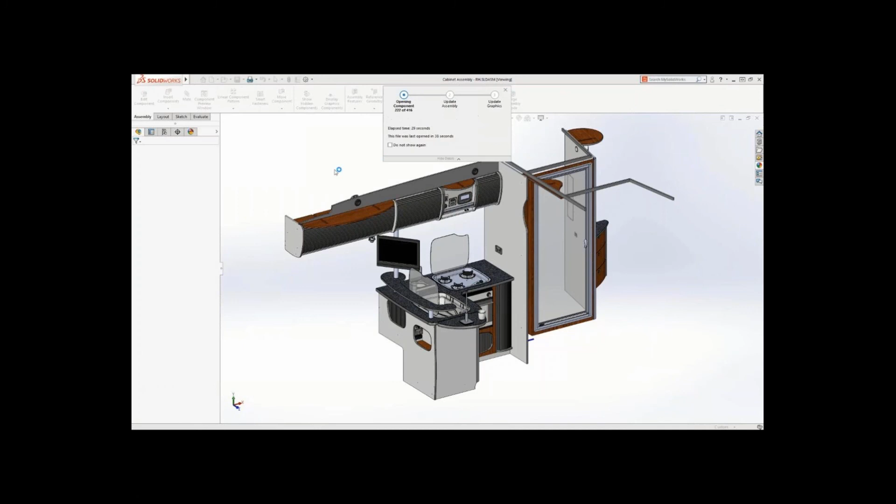Gaining deep insight into how your assembly is performing and which factors are slowing you down is where the new assembly performance dialog excels. SOLIDWORKS 2018 includes many more checks such as open time, shaded image quality, and number of graphic triangles. Here, several parts have been set to very high image quality, which dramatically increases the number of graphic triangles, which can have a detrimental effect on performance.

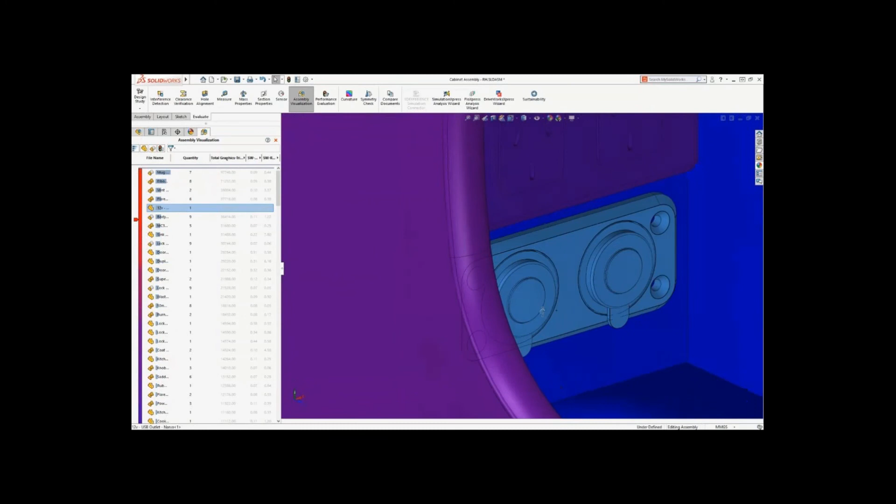To gain deeper insight on how problems are slowing you down, SOLIDWORKS 2018 now lets you see clearly the performance information with the assembly visualization tool. This is a really fast and convenient way to display all kinds of SOLIDWORKS information, meaning you can identify problem components. Like this USB outlet - this part itself has very high image quality, which is most likely inappropriate for this scenario. We can change the part by simply selecting a different configuration with low image quality.

Next, SOLIDWORKS 2018 introduces a new top-level assembly transparency option that gives you one step - no need to either set individual sub-assemblies transparent or to create new display states. This new mode lets you interrogate the model more thoroughly and removes extra steps that are needed to add the transparency.

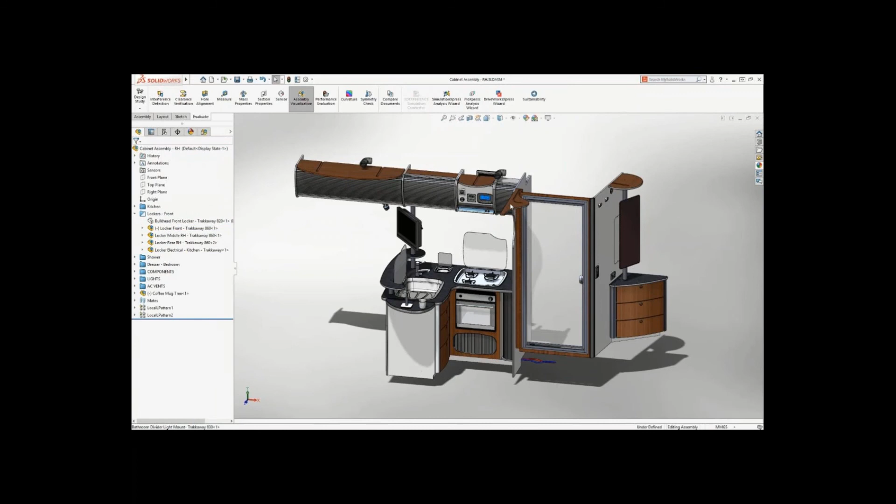Folders are widely used by our customers as a way to logically group parts and assemblies without creating more sub-assemblies. SOLIDWORKS 2018 now color codes these folders based on whether they contain hidden or suppressed items. This gives you a simple visual cue to help identify these objects faster than ever before.

Now, mouse gestures are more flexible than ever in SOLIDWORKS 2018. You can select two gestures, horizontal or vertical, right up to 12. It's simple to drag new commands into the gestures, and you can even copy them between modes by dragging and holding the control key. You also have a handy printable guide for your office or desktop.

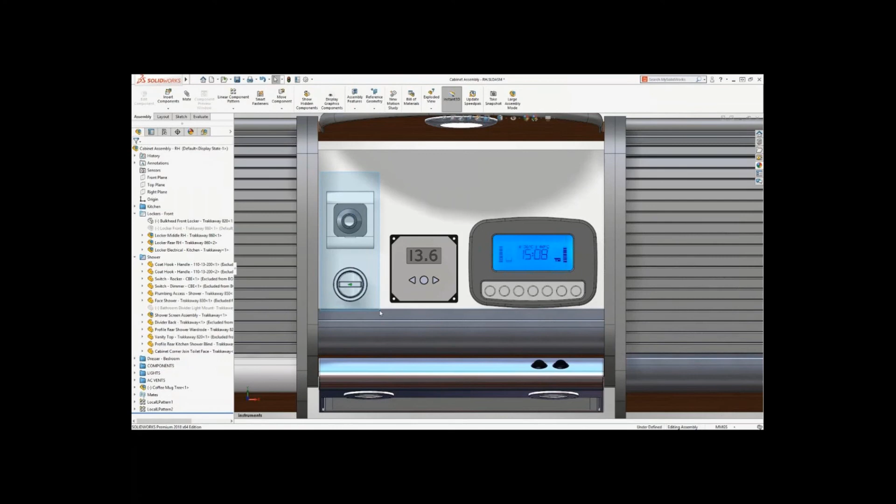It is common that when you zoom right into the model, you need to box or lasso select geometry or components. Previously, this required you to select in open space before dragging. Now in SOLIDWORKS 2018, a new option called Select Over Geometry removes this limitation. You can either select it in the drop-down or use the T key shortcut to enable it. You can even use the Control key to select multiple items at once.

Now, these are some of just the enhancements that help you focus on your design and improve your everyday experience with SOLIDWORKS 2018.

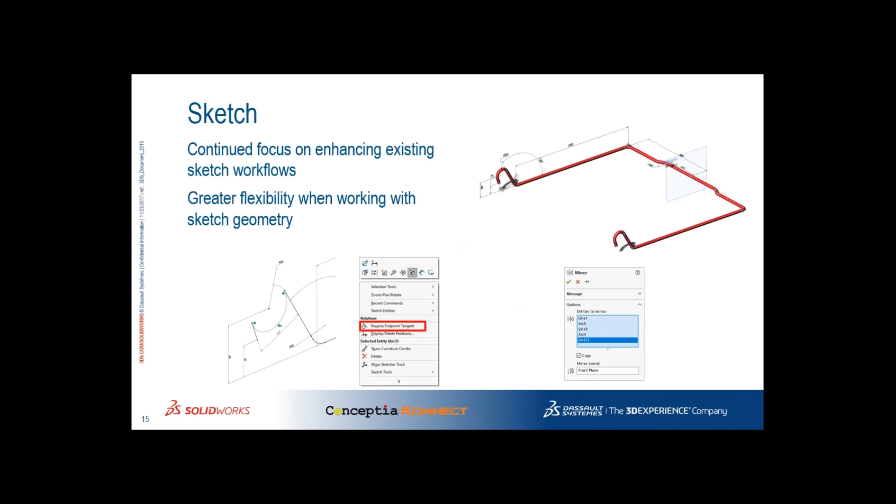Next, we'll take a look at sketches. Sketches are the fundamental building blocks of any SOLIDWORKS design. Therefore, you need them to be as intuitive and as productive as possible. SOLIDWORKS 2018 builds on existing sketch workflows, adding new capabilities for customers working with 3D sketches and more flexibility when modifying arcs and splines. Let's take a closer look with the software.

Now, SOLIDWORKS 2018 delivers some great new capabilities that enhance existing sketch workflows. Let's go ahead and finish the design of this support bar. Giving you more flexibility when working with arcs and splines, you can now switch the tangency direction of the arcs using the new option on the right mouse button menu. This new option eliminates the need to delete and recreate the entity that could otherwise cause the downstream failure of the reference features.

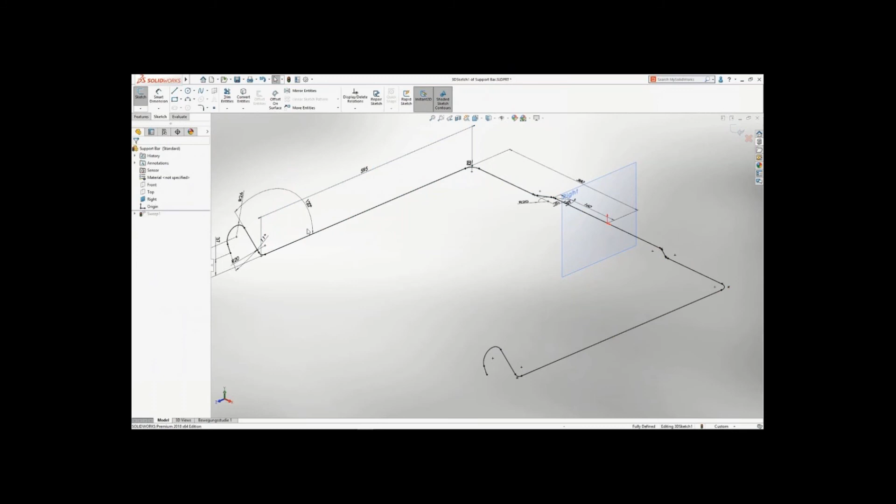Now, when working with 3D sketches, you can build in symmetry at any time by mirroring the sketch entities, and not only that, the planes can now also be used as mirror reference in both 2D and 3D sketches. With this, the symmetric relations are captured and maintained, giving you visualization of the complete shape as you refine your design. Now you can build in all the design intent you need right from the start.

So no matter what you're designing, all these new capabilities in 2018 make working with sketch geometry easier and even more intuitive. This helps you to capture more design intent in the 3D sketches, and the added flexibility in 3D sketches is a powerful enhancement for customers designing weldments.

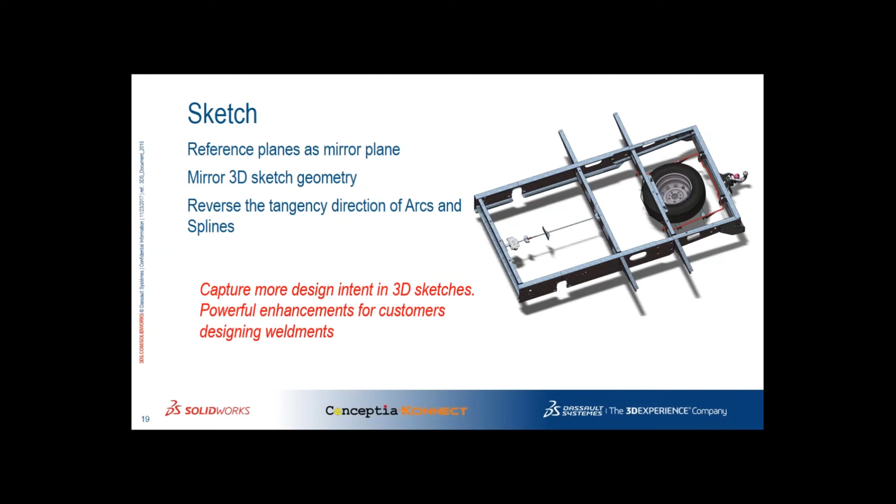Let's go ahead and take a look at the enhancements in assemblies. Now, in today's global marketplace, great products need to get built faster than ever. SOLIDWORKS 2018 introduces enhancements that help you deliver assembly designs in record time and with less effort.

Now, when creating linear pattern of components, you now have the ability to add optional rotation. After choosing the number of instances, you can simply select a rotation reference and specify the increment angle. This speeds up the creation of all kinds of innovative designs and removes the needs for additional features.

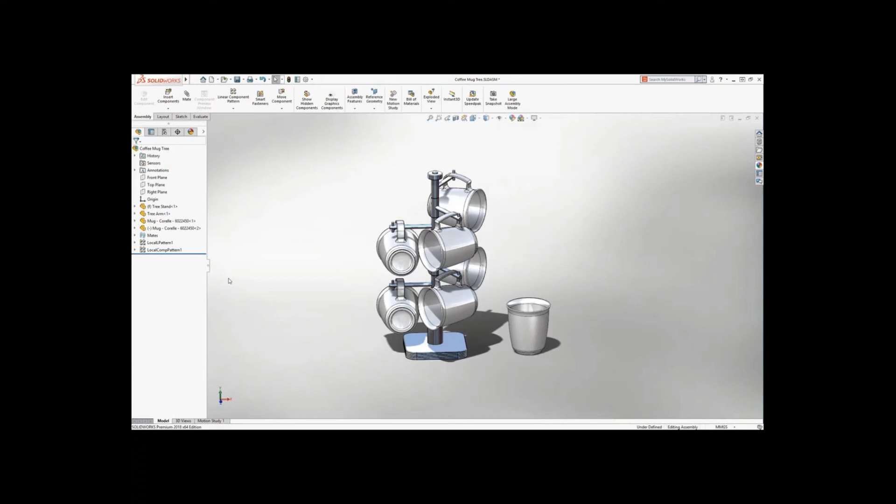Adding mates to hidden surfaces can be a bit more challenging. 2018 speeds up the process by allowing you to temporarily hide surfaces while in the mate command by pressing the Alt key. You can now select the hidden faces and get your parts in place fast.

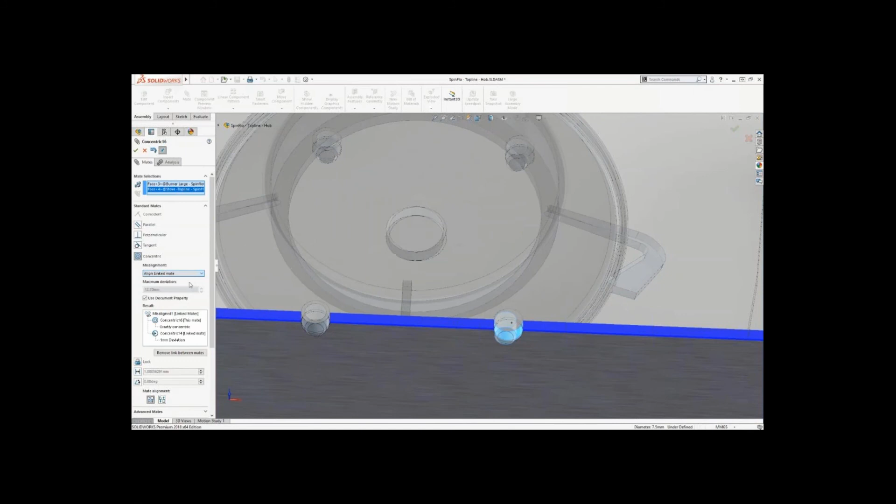When working with components with different units or even imported parts, you have a common scenario where pins and holes in the body do not exactly match, as in this case. Previously, it would not be possible to add the second concentric mate. Now in 2018, you can create misaligned mates. This allows you to add two concentric mates to be solved correctly by maintaining the concentricity of either mate or by shifting the component symmetrically between the two, solving accurately and giving you instant feedback.

The PropertyManager displays useful information about the misalignment, and also the deviation of each mate from the concentricity is shown, and you can set the maximum allowable deviation. This value can be controlled by a document property, and misaligned mates are shown clearly in the mates folder, and for additional control, the ability to create these misaligned mates can be disabled in the system options. This capability removes the need to make small changes to legacy components that may be used in many different assemblies.

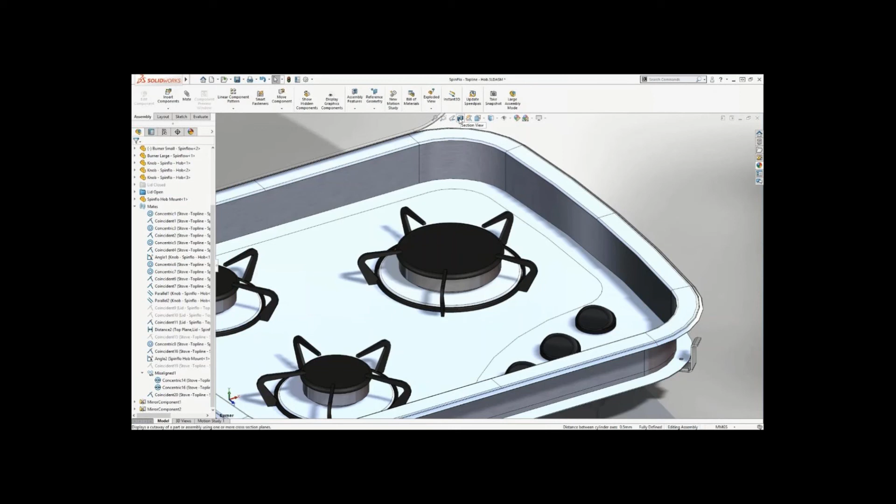Creating exploded views is great to understand and communicate your designs in SolidWorks. Now with SolidWorks 2018, you can quickly and easily create automatic explode lines using the explode line tool. SolidWorks automatically gathers all the components in the exploded view and previews each explode line. The explode line for each component defaults to the bounding box, but you can easily choose the origin or even drag to any other point.

SolidWorks allows you to apply this to every other identical instance, saving you a load of time and effort. As you would expect, modifying the exploded view updates the exploded lines instantly, keeping everything accurate and up to date. These are some of the enhancements in SolidWorks 2018 that improve your day-to-day productivity to get your products and assemblies built faster.

With this, we can build assemblies faster than ever before.

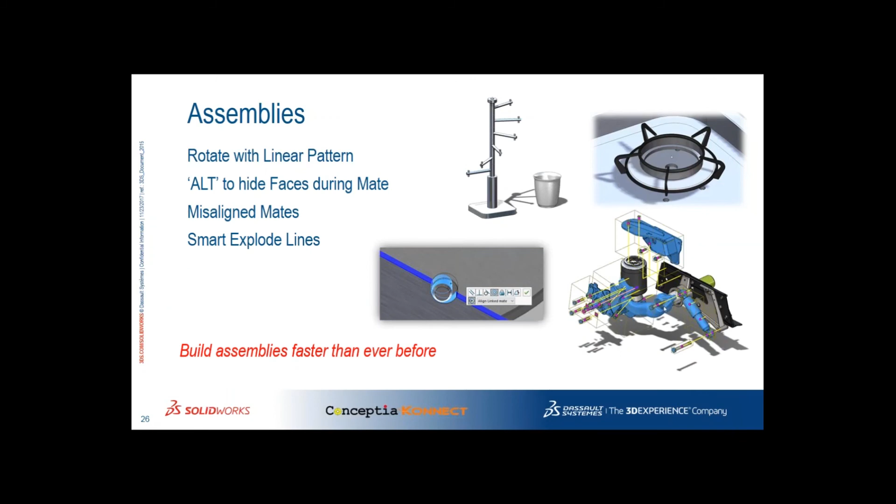Next, magnetic mates were introduced in 2017. They enabled users to easily snap components together to efficiently organize equipment and optimize the space. Many use cases have been identified, such as equipment layouts and rapid assembly of components with common mating interfaces. Now, SolidWorks 2018 brings continued development to this tool. Let's take a look at the improvements in magnetic mates.

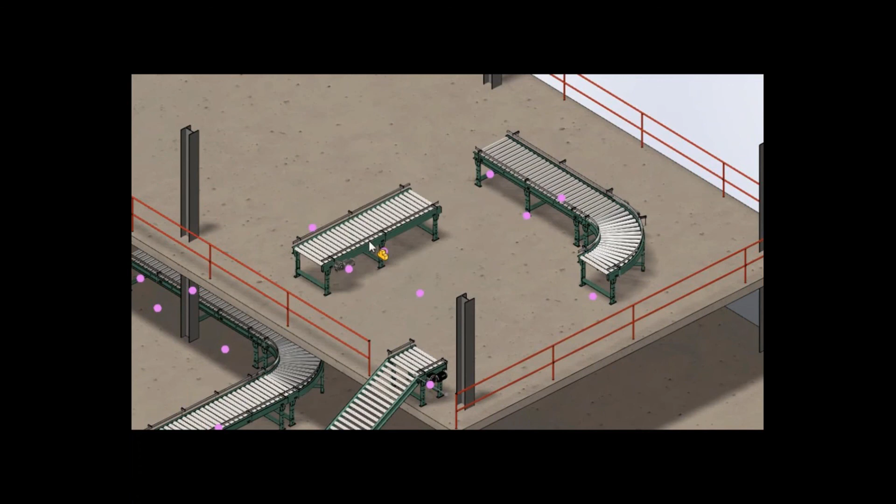There are several enhancements to the magnetic mates tool. First, we now support multiple ground planes. You can simply activate the ground plane you want to work on, and when you assemble components with published assets, they will be snapped to that ground plane automatically. The tab key rotates the component around a vertical axis for better positioning.

Locking a magnetic mate from being unsnapped has existed before, but now it is much more discoverable. The lock mate icon appears as soon as a component is placed. This is much easier than finding the mate in the feature manager tree and choosing the lock option.

New keyboard shortcuts are now available to cycle through the magnetic mate options. You can choose the open square bracket to cycle through the mate options on the moving component, and the close square bracket to cycle through the available mate options on the static component.

With the ability to snap components together on multiple ground planes, and easier access to the lock mate and connection point cycling, it is easier than ever to build assemblies.

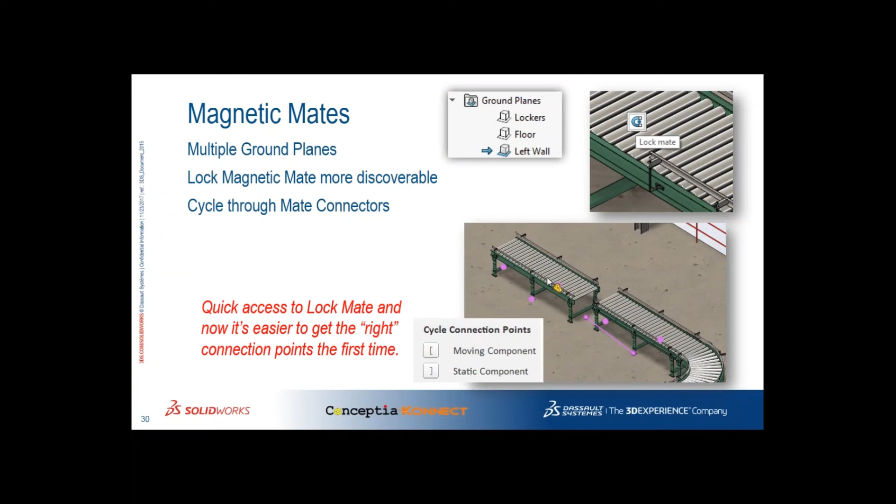Next is SolidWorks Treehouse, a powerful tool for creating and managing assembly structures. The enhancements in Treehouse 2018 focus on improving existing workflows. For example, viewing and editing part and assembly information is quicker and much more intuitive. Let's take a look at these enhancements in more detail.

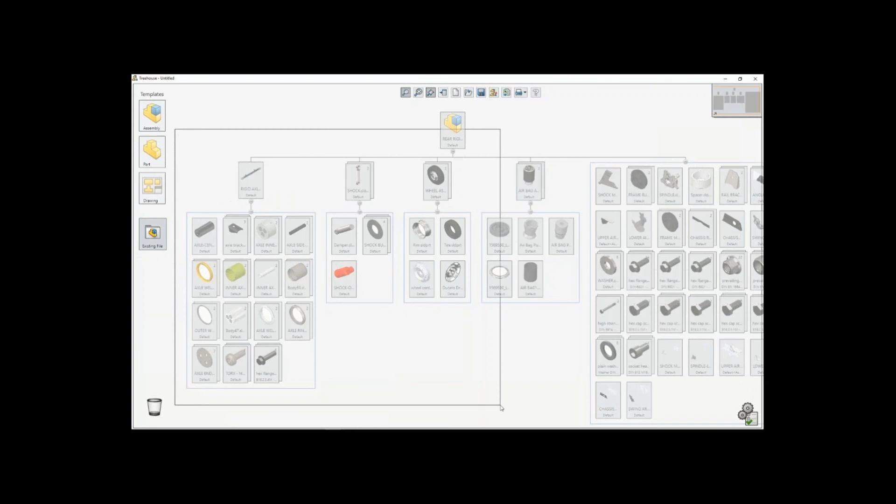SolidWorks Treehouse is a powerful tool for creating and managing assembly structures. In Treehouse 2018, it is easier to view a specified area of the assembly using the new zoom to area command. Simply drag a rectangle over the area of the assembly you want to enlarge, and it is brought into view, making it quick to navigate assembly structures that would otherwise be too large to fit on screen.

Treehouse has been a great way of managing the custom properties of SOLIDWORKS documents. Now in 2018, assembly structures can be viewed in table form using the list view display option. The resulting table makes it easy to view all the available properties for each document, plus additional information such as active configuration, description, and quantity, all in one place.

You can edit the table view at any given time, and when you finish making changes to the table cells, such as changing the quantity of the shock assembly, this is instantly reflected back in the assembly structure, as you can see here.

Next, Treehouse 2018 introduces new options to give you more control when printing your assembly structure. The new print display command, combined with the new print preview option, enables you to easily print any part of the assembly structure with minimal effort. These new enhancements in Treehouse 2018 will make you more productive when managing your assembly structures.

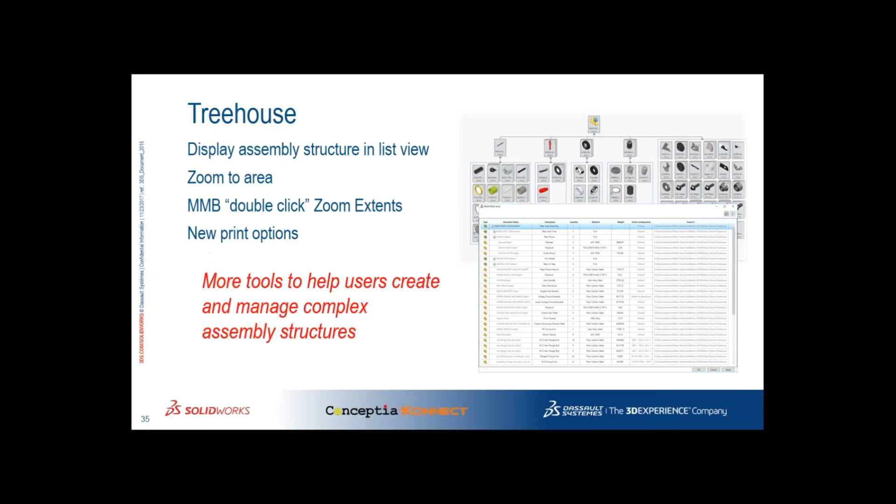Keeping focus on the core parts and assemblies while improving the surrounding tools that are essential to the design process, SOLIDWORKS 2018 delivers the essential functionality to speed up your design process. Next, let's dive right into smart manufacturing.

SOLIDWORKS 2018 puts the model at the center of your design and manufacturing process. It provides a single source of intelligent information for topology optimization, rapid PMI creation, knowledge generation with CNC programs, or creating automatic inspection. Your model is central to all the design process. Let's take a look at what this means in a short video.

SOLIDWORKS 2018 delivers a powerful suite of tools that provides a completely integrated design to manufacturing solution. Validate design function and optimize form, all while building intelligent manufacturing information directly into your design. Then use it to automate downstream machine programming and inspection processes to get your products to market fast.

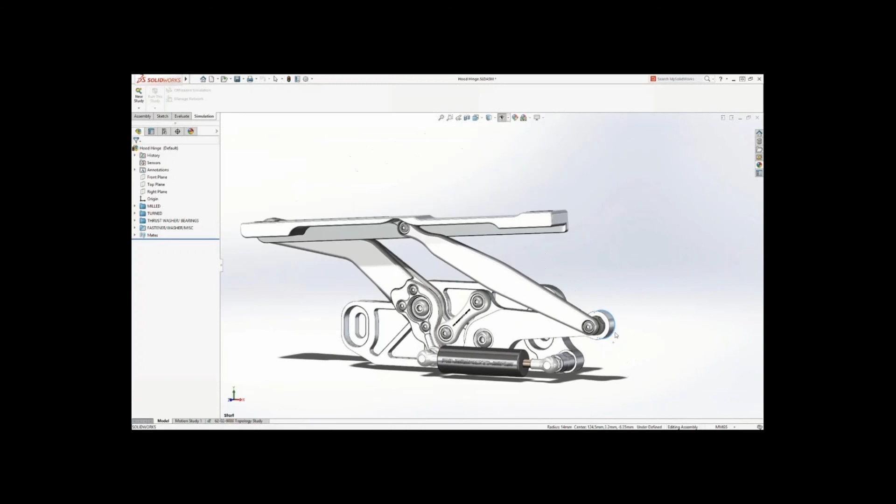Topology Study in SOLIDWORKS Simulation Professional lets you focus on validating the design function, and SOLIDWORKS delivers the component's form. Based on real-life use, desired goals, constraints, and even manufacturing considerations, Topology Study provides results to guide your decisions on component form, regardless of the manufacturing process you choose, and final validation is easier than ever before.

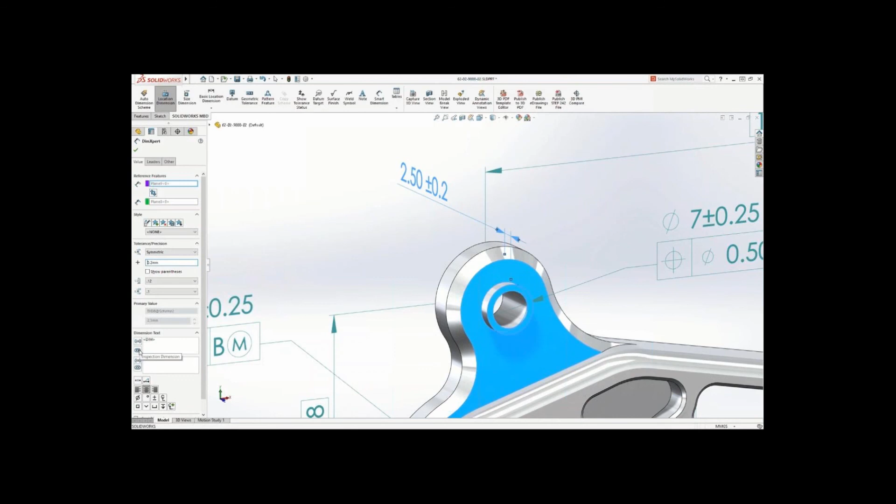Putting the 3D model at the center of the process, using SOLIDWORKS model-based definition, all the product manufacturing information, or PMI, required to manufacture your design can be applied directly to the 3D geometry, removing the cost and time overhead of creating 2D drawings. Presenting PMI data this way makes it easy to understand and removes ambiguity, from detailing relevant datums to features like holes complete with detailed tolerance information.

When you're ready to manufacture your design, SOLIDWORKS CAM delivers fully integrated knowledge-based CNC programming. Leveraging the PMI directly from the 3D model, SOLIDWORKS CAM automatically applies your preferred machining strategies to the part based on the tolerance scheme. If the tolerance specification of a feature changes, SOLIDWORKS CAM automatically updates the machining operations using predefined rules that match your manufacturing best practices. Parts that once took hours or even days to program can now be programmed automatically in minutes.

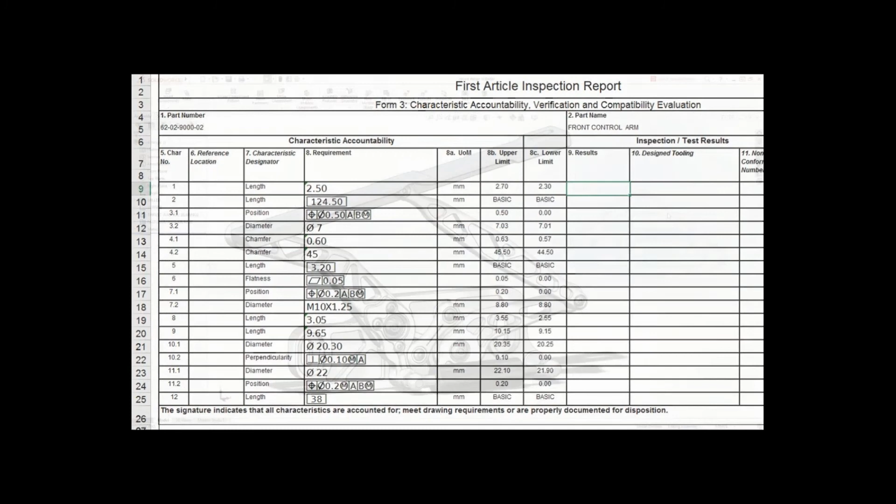At the same time, by using SOLIDWORKS Inspection, your quality team can utilize the PMI on the model to generate first article inspection reports that are ready to be utilized by quality control as final inspection documentation, streamlining your quality control processes even further. In a fast-moving design to manufacturing environment, making sure everyone has the right version of the right document at the right time is critical to ensuring your product is delivered on time and on budget.

SOLIDWORKS PDM manages and synchronizes design data across your entire organization in a centralized, secure vault, providing a scalable solution from just a single project to many locations across multiple geos. SOLIDWORKS 2018 puts the 3D model at the center of your design and manufacturing process, providing a single source of intelligent information that opens up new areas of innovation, increases productivity, and helps get your products to market even faster.

Next, we'll take a look at the enhancements in SOLIDWORKS MBD, that is model-based definition. It is much more powerful than before. If you don't know, MBD is a tool that allows you to create product manufacturing information right onto the 3D part, so that you don't have to create the 2D drawings. So all the product manufacturing information, that is dimensions, geometric tolerances, everything can be given right to the 3D model and be exported as 3D PDFs or e-drawing files, so that you can replace completely your 2D drawings.

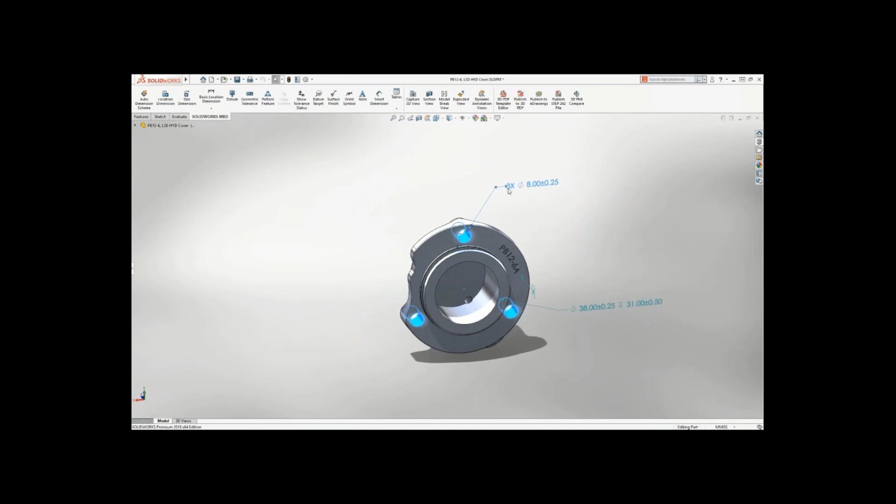Let's take a look at the enhancements to MBD in 2018. Model-based definition in 2018 is more powerful than ever. It allows you to more accurately define all the manufacturing information needed within the 3D model. This cover part represents a common scenario wherein the positions of these 3 mounting holes are equally important.

2018 now supports the application of datums to the patterning features, enabling you to more accurately represent real-life behavior.

We can add 3D notes to convey extra product information that would normally exist in a drawing title block. Along with it, we can also add the overall profile tolerances, which can be edited in the standard GTOL dialog box. Let me change it to 0.2.

Next, 2018 now enables the display of the part level product manufacturing information at the assembly level, just like this. This removes the need to recreate it at the assembly level for use in other products like SOLIDWORKS CAM.

You can now remove extra steps of creating corresponding PMI for fixed or floating fasteners. By using this new auto pair tolerance tool, simply select the source and target, and SOLIDWORKS creates the dimension scheme automatically.

New PDF templates are now available in SOLIDWORKS 2018. These have been overhauled to include more information and look more professional. You can now publish 3D notes from SOLIDWORKS directly into a PDF text field. This includes the special GTOL character as we have created earlier.

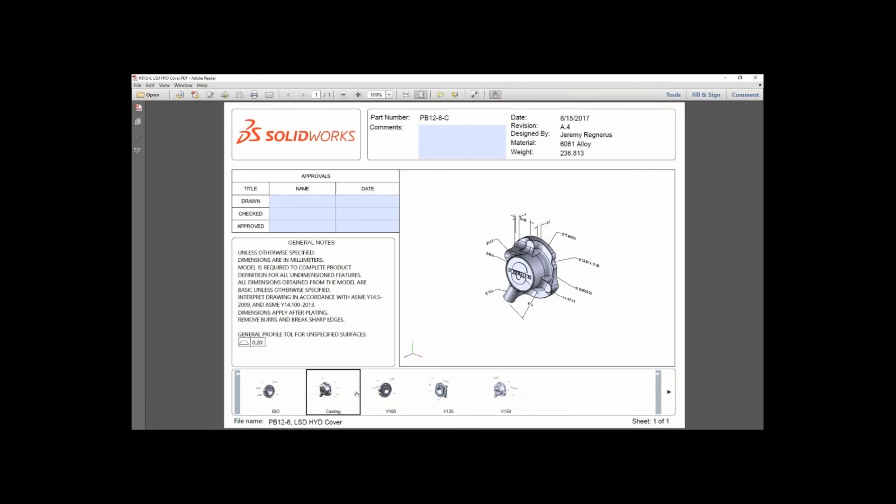The 3D views representing the different configurations of the cover are now accessible with the below thumbnails. New in 2018 is the animated slideshow, which helps you bring your design to life right into the PDF. Finally, custom properties can now be reported as configuration specific, giving you more information about the whole product family.

In addition to PDF, many companies use e-drawings to distribute their product information. During the export process, you can now choose whether to export STEP 242 files for each of the configurations. These step files appear as attachments within e-drawings and can be viewed, extracted, or deleted from the new attachment dialogs.

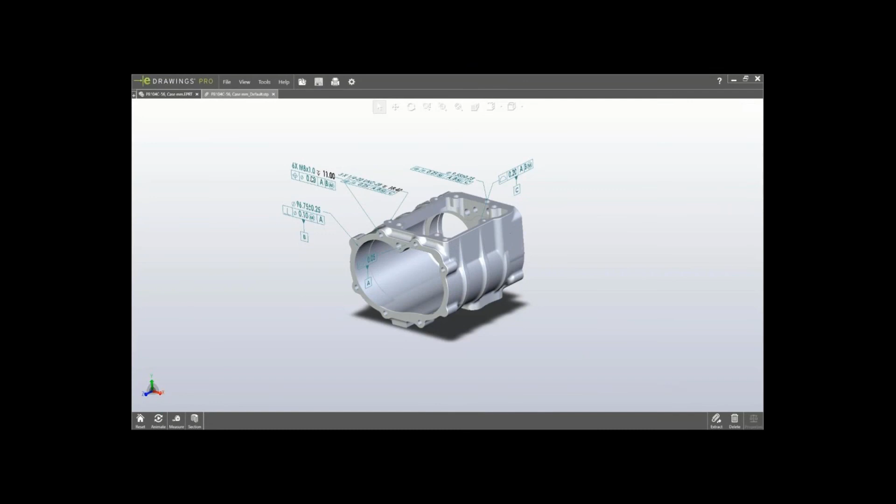Step 242 exported files now contain fully intelligent annotations. These are machine readable by third-party applications such as CAM applications. 2018 now allows you to import step 242 files along with Creo, Siemens NX, and CATIA files, which consist of the PMI source, and the PMI from the source is transferred through and accurately carried across. Highlighting this, the PMI helps you understand and reuse the original design.

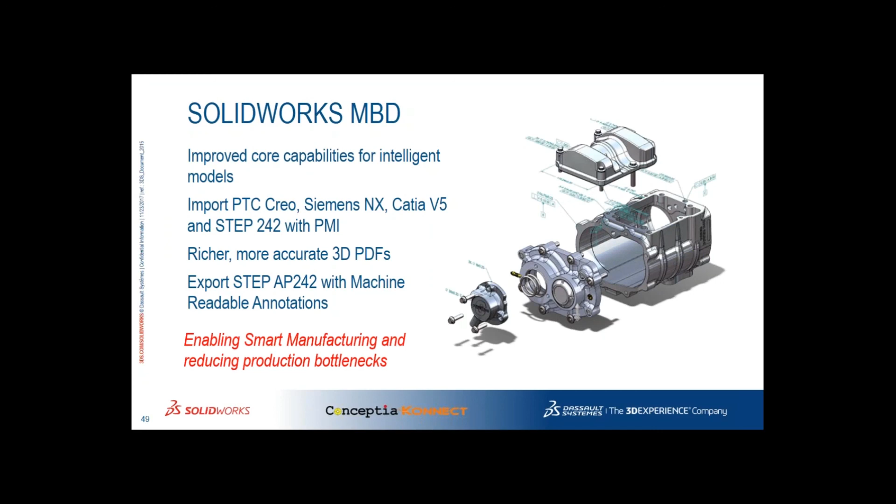MBD helps companies get products through production faster than ever before. Model-based definition helps companies get products through production faster, enabling smart manufacturing and reducing the production bottlenecks.

Next, new to SOLIDWORKS 2018, we are launching SOLIDWORKS CAM. Every year the SOLIDWORKS product keeps on expanding, and this year we have now launched SOLIDWORKS CAM. Let's go ahead and take a look at the product features.

CAM allows you to have CNC programming inside of SOLIDWORKS. It is powered by the existing CAM software called CAMWorks. If you're already using CAMWorks, it is very easy to use SOLIDWORKS CAM.

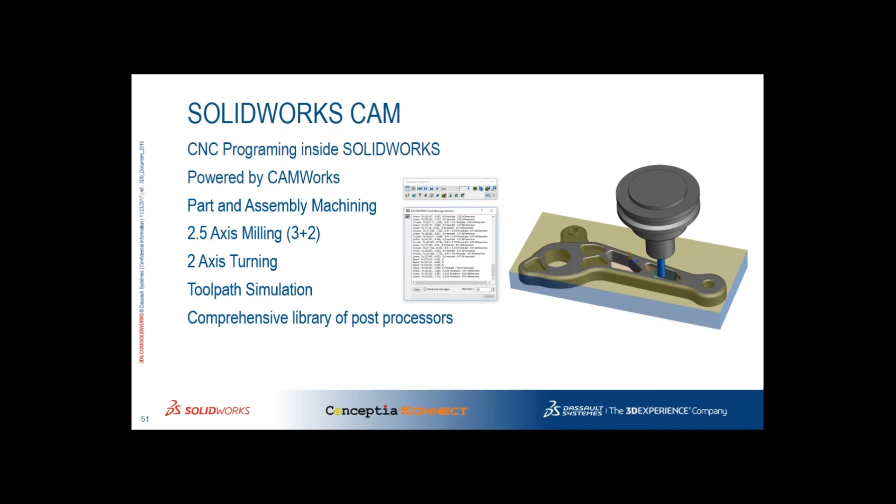Initially, SOLIDWORKS CAM supports both part and assembly machining, and it supports 2.5 axis milling along with 3+2 machining and 2-axis turning. It also has the capability for tool path simulation and has a comprehensive library of post processors. Let's go ahead and take a look at the software, which we are launching this year.

CAM delivers fully integrated knowledge-based CNC programming right inside SolidWorks. SolidWorks CAM generates machining information fast using automatic feature recognition, standard operations and strategies defined with your own best practices, including step over, cut depth, tool type and size, instantly applied to the model, freeing up your time to focus on the critical areas of the part.

At any time, additional machining operations can be manually created using the SolidWorks model geometry. Faces to machine and areas to avoid can be defined using a comprehensive suite of selection options, eliminating the need to create additional reference geometry on the part.

Using SolidWorks CAM's powerful simulation capabilities, cutter paths can be previewed and compared against the original model, helping you identify any potential problems or areas requiring further refinement long before the physical part is actually machined.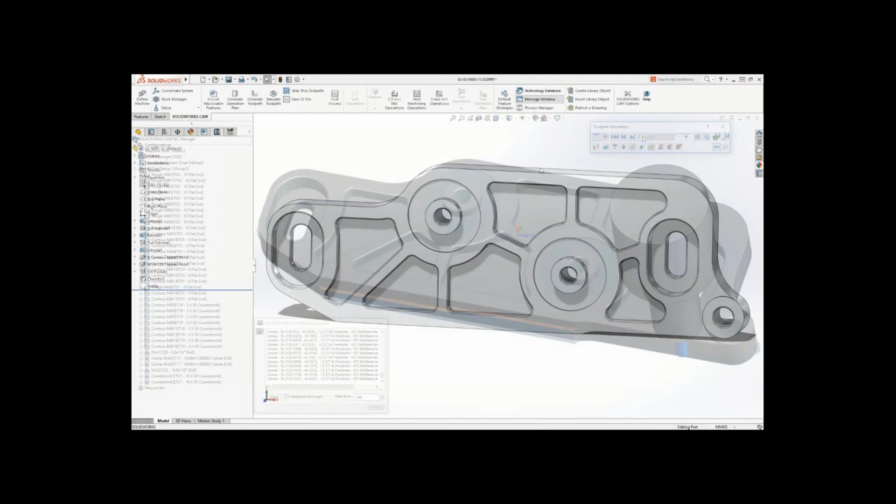Any changes made to the SolidWorks design can be instantly applied to your machining operations and cutter paths, making it quick and easy to evaluate your parts for manufacture, much easier in the development.

SolidWorks CAM can also be used for turning operations with toolpath simulation.

CAM delivers powerful knowledge-based CNC programming for parts and assemblies, milling and turning, that provides a single integrated solution from design to manufacture.

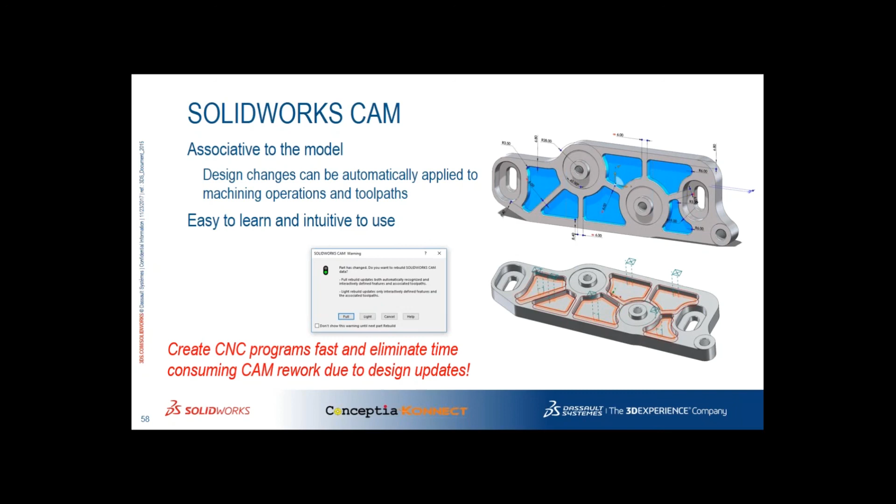Now, SolidWorks CAM supports tolerance-based machining, that is TBM. Let's go ahead and quickly take a look at how this works.

Tolerance-based machining in SolidWorks CAM introduces a powerful new capability that dramatically reduces the time required to generate CNC programs for parts with close tolerances and surface finish requirements. It leverages DimXpert dimensions and model-based definition information created by MBD, applied directly to the 3D model.

With a single button click, SolidWorks CAM automatically applies your preferred machining strategies to the part based on the tolerance scheme. If the tolerance specification of a feature changes, SolidWorks CAM automatically updates the machining operation using predefined rules that match your manufacturing best practices.

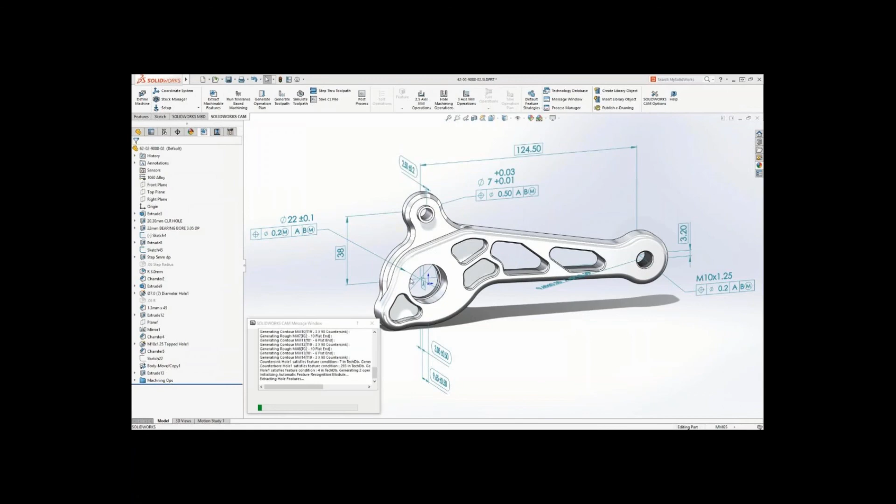Parts that took hours or even days to program can be programmed automatically in minutes. Asymmetric tolerances can be adjusted to mean values, and all of the tools, speeds, feeds, and depth of cuts are automatically selected to meet the model-based design requirement.

With this tolerance-based machining in SolidWorks CAM, it streamlines your design to manufacture by leveraging the power of model-based definition to automate CNC programming and reduce overall delivery times.

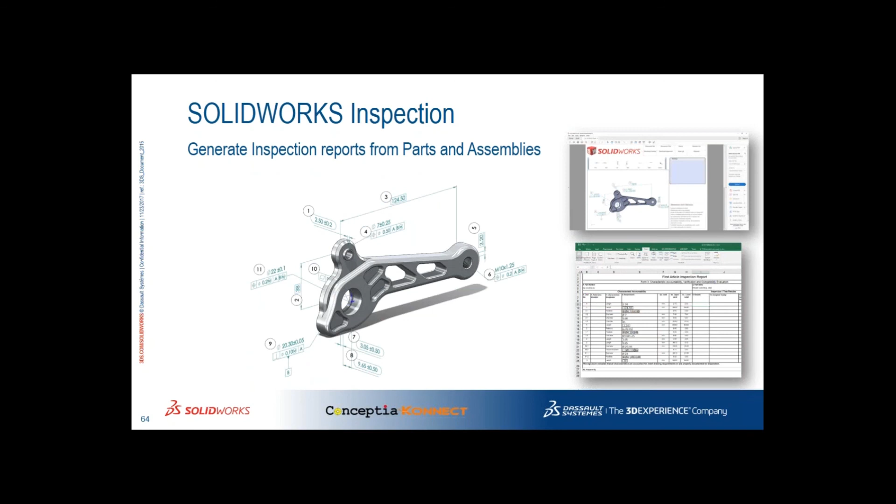Next, we'll move on to SolidWorks Inspection, which enables us to create first article inspection reports used in the quality departments. Now let's go ahead and take a look at the enhancements in the 2018 version of SolidWorks Inspection.

Leveraging the power of model-based design, in Inspection 2018, first article inspection reports can now be generated from dimensions and annotations that have been applied to the model geometry using SolidWorks MBD and DimXpert.

New projects can be defined with just a few clicks. First, choose your template. Then SolidWorks Inspection instantly recognizes and extracts critical information from your model, such as custom properties, dimensions, and annotations. Next, choose the type of 3D annotation you want balloon, and in a matter of seconds, Inspection will balloon and extract all of the key information required.

Selecting an annotation in the characteristic tree displays its inspection information and highlights the related item on the model, making navigation quick and easy. Once all of the model information has been captured, you can automatically generate first article inspection reports using a variety of industry standards or one specific to your organization, ready to be utilized by your quality control department as final inspection documentation.

With this, you can eliminate the time and effort of creating 2D drawings, and from the 2D drawings, the creation of 2D inspection reports.

With SolidWorks Inspection 2018, first article inspection reports can be created in minutes instead of hours by eliminating the need to create 2D inspection drawings.

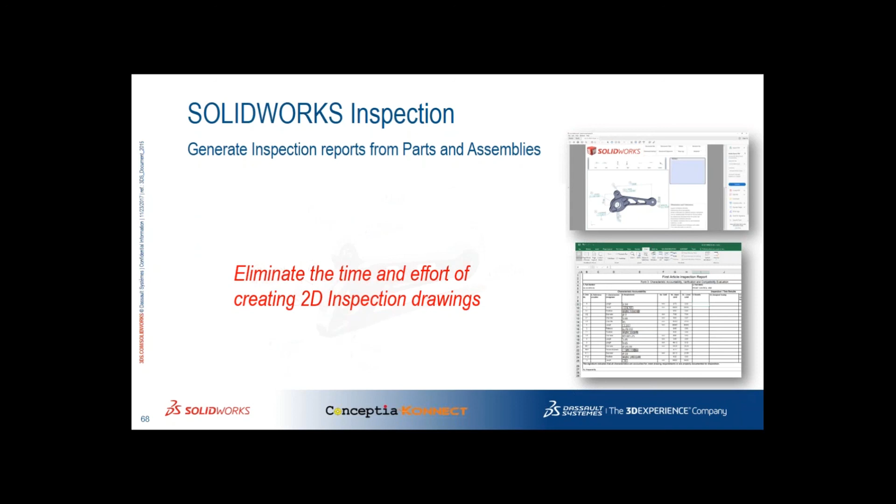With SolidWorks 2018, you can put the model at the center of your design process, truly the next generation of the design to manufacturing process.

Next, we'll move on to next generation design. SolidWorks 2018 brings a host of new functionalities to tackle the next generation of the design process, functional tools you need to tackle new design challenges and address how users want to work today.

The first thing you notice with SolidWorks 2018 is the new login option. Users can now directly access their My SolidWorks account from the user interface, providing many new options. With 2018, settings can follow the user to automatically preserve and maintain their settings wherever they log in, similar to Google Chrome or Windows 10. This is particularly valuable for customizations, which are by their nature personalized by the individual user.

Users often have multiple SOLIDWORKS products and services, with multiple licensing options including standalone, network, perpetual and term licenses. SOLIDWORKS Admin Portal is an online tool to help users manage their SOLIDWORKS assets. Administrators can easily see the products and services they have, manage their users, and assign different products to different users.

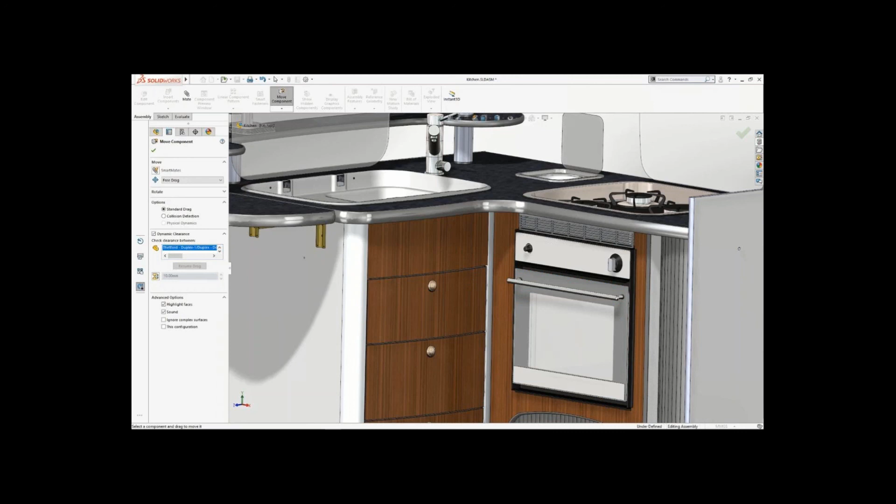You can rotate the screen using both thumbs. With rotation locked, selections can now be made with just a single finger tap on screen, and with a finger tap on this drawer, I can move it through its range of motion. At any time, you can easily return to rotating and zooming the model with your fingers by tapping rotate on the touch toolbar to disable it.

When working in touch mode, mouse gestures are another great way of accessing frequently used commands at your fingertips. With on-screen finger press and drag, the mouse gestures ring is displayed. Simply move your finger over the desired command to activate it. To bring the tap closer into view, we first select zoom to area, followed by a finger swipe to define the zoom region.

Making modifications to the design using touch interaction in 2018 is quick and intuitive. Following the same workflow as using a mouse, a single finger tap on the face is all that's required to select the entity and display relevant context menu commands. Icons appear larger for easy selection with finger or pen, and right mouse button menu commands can be accessed via the down arrow. A new configuration of the tap can be easily selected and applied with a few finger taps on screen, replicating traditional mouse clicks.

The final change required to this design is an increase in the height of the shelf situated behind the sink. The new touch magnifier tool is a great way of enlarging a small area to make a selection. While keeping the rest of your design in view, just press your finger or pen on the screen for longer than 2 seconds, and dynamically adjust the zoom level using the controls on the touch toolbar. When your finger is released, the object's crosshair stays in place.

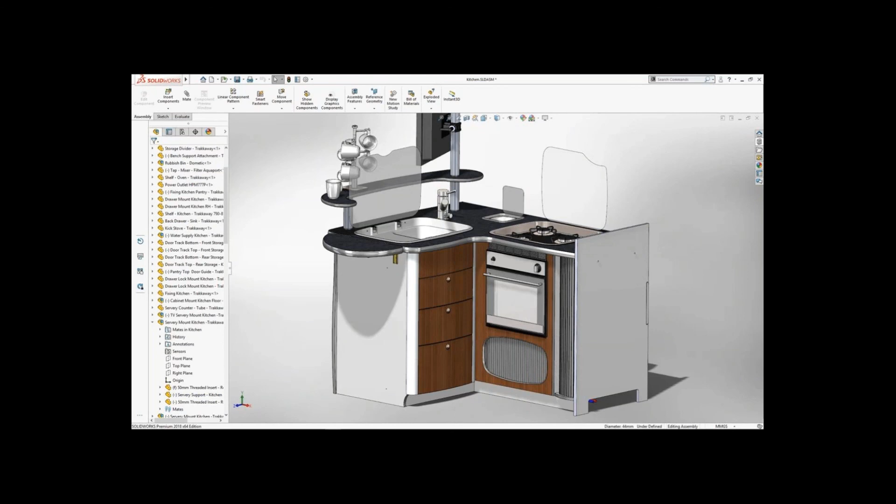When editing a feature or dimension, the new touch number pad makes it quick to enter values, eliminating the need to use the Windows virtual keyboard that can sometimes take valuable screen space. With this, you can even work with touch-enabled designs. Whether on the move or in the office, SOLIDWORKS 2018 Touch Mode delivers a powerful set of productivity tools for working with touchscreen devices.

Next is touch sketching. You can use freehand sketches using a Windows 10 touch-enabled device. It automatically converts pen strokes to shapes and sketch entities at any time. Let's go ahead and take a look at this.

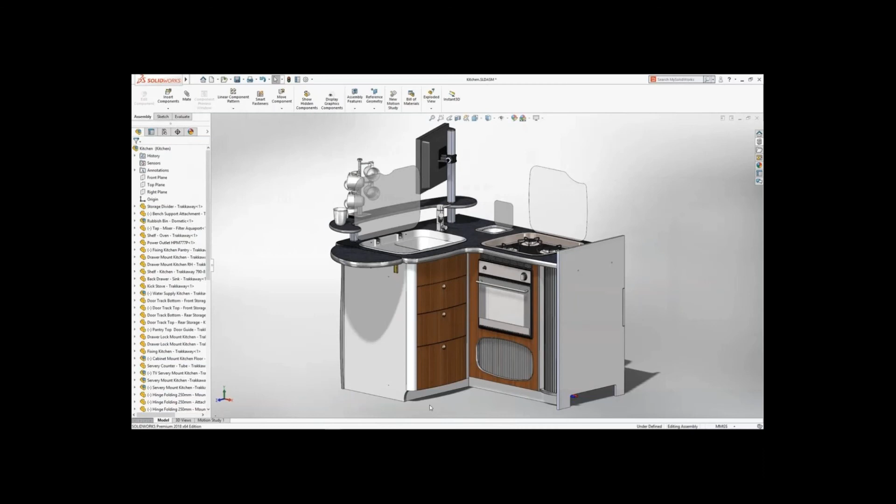With 2018, you can capture your design ideas even faster when using a Windows touch-enabled device by freehand sketching with either your finger, pen, or stylus directly in a sketch. Let's go ahead and design a new draining board pattern for this sink.

Simply start a sketch on either a plane or face, and then use the brand new set of tools available from the command manager. First set your preferred pen style using the color palette and the thickness slider, then you're ready to go. Different sketch modes enable you to choose how your gestures are interpreted by SOLIDWORKS.

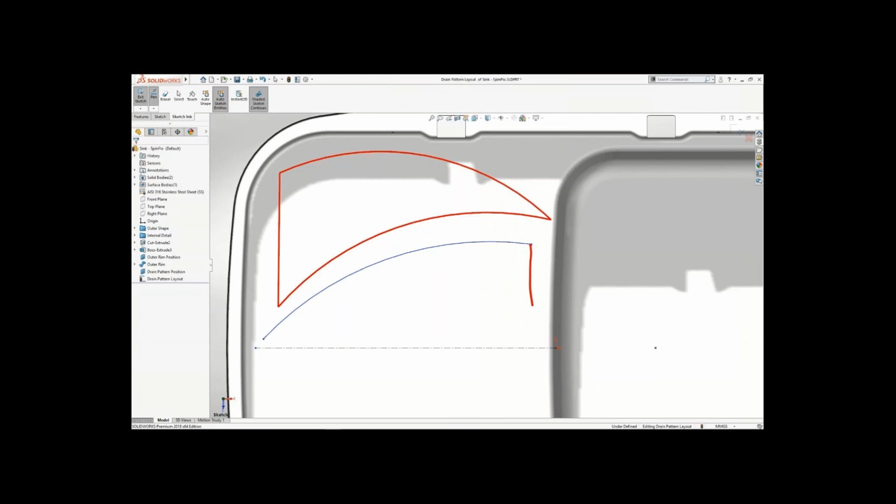Using auto shape, your captured pen or finger strokes are initially converted into true geometric shapes such as lines, arcs, and circles, perfect for sketching out concepts. Switching to auto sketch entities, your strokes are converted directly into sketch entities as you draw them, making them immediately available for your feature creation.

As you sketch, relations to surrounding geometry can be automatically inferred as you go, enabling instant capture of design intent—for example, these two concentric circles for the plug hole area. Pen strokes that have been captured as shapes can be converted into sketch entities at any time by selecting them and using the new Convert to Entities feature, giving you complete flexibility as you develop your ideas.

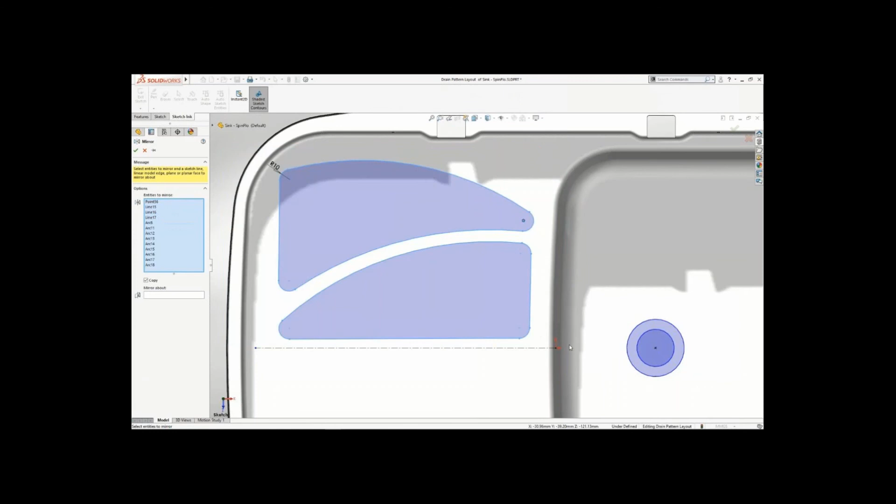When you're finished, the resulting sketch can be manipulated and modified just like any other, for example adding fillets to round off corners and dynamically dragging entities. Mirroring the two contours about the center line completes your overall design.

With the sketch now complete, a simple extrude used in combination with the contour select tool is all that is required to add draining board geometry to the sink. Whether you're designing complex shapes or simple mechanical parts, touch screen in SOLIDWORKS 2018 offers a completely new approach to capture rapid fire design ideas, whether you're in the office or on the go.

This helps you capture rapid design ideas very quickly by using the new touch sketching options.

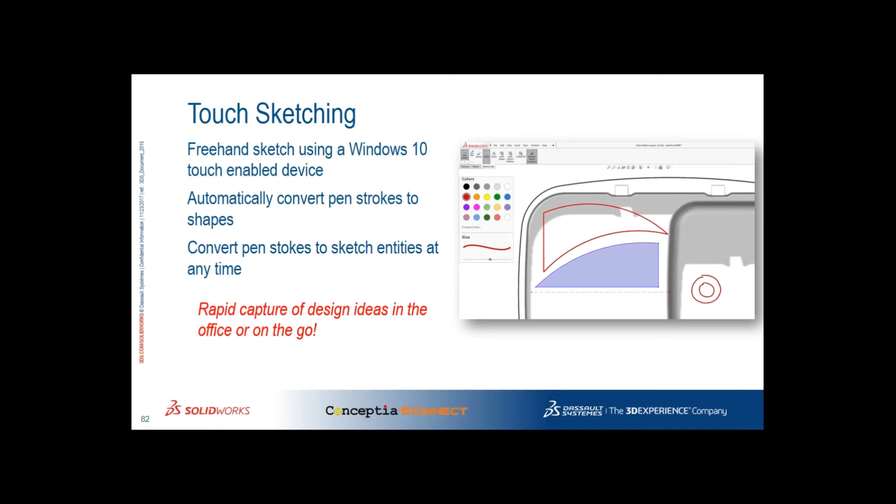Next, new in SOLIDWORKS Simulation, if you are using it: new in SOLIDWORKS Simulation 2018 is the Topology Study, which lets SOLIDWORKS guide your optimal design form while you stay focused on the function, giving you validated results you can leverage for traditional manufacturing methods or a path to additive manufacturing.

In this example, we'll look for the best stiffness to weight ratio. Let me define the value.

Additionally, you can use manufacturing controls like wall thickness or symmetry. Here we'll use preserved regions to maintain enough material for the bearings.

Demold tools give results more suitable for traditional manufacturing processes like casting or machining. We'll use stamping for machinable results.

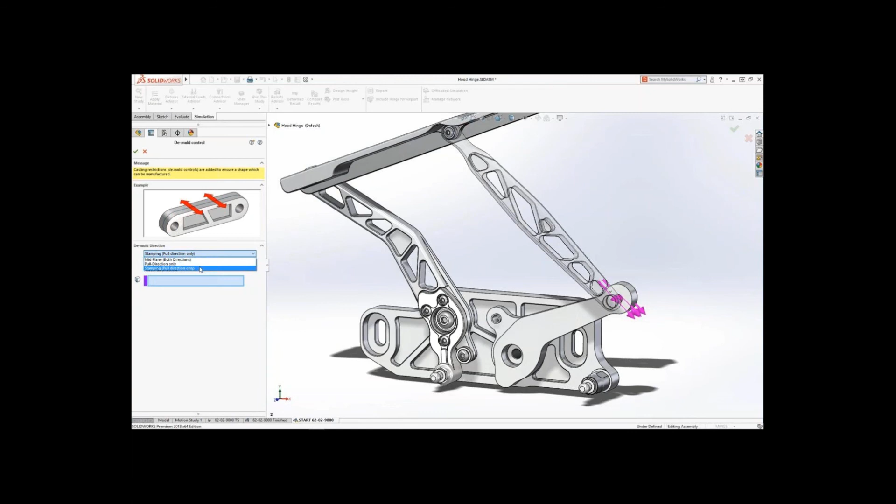Topology study uses an iterative solver. Rather than wait, let's jump to the finished study. Results include a plot showing material safe to remove.

Additionally, a stress calculation based on the mesh result is also available, giving you even greater confidence in recommended topology.

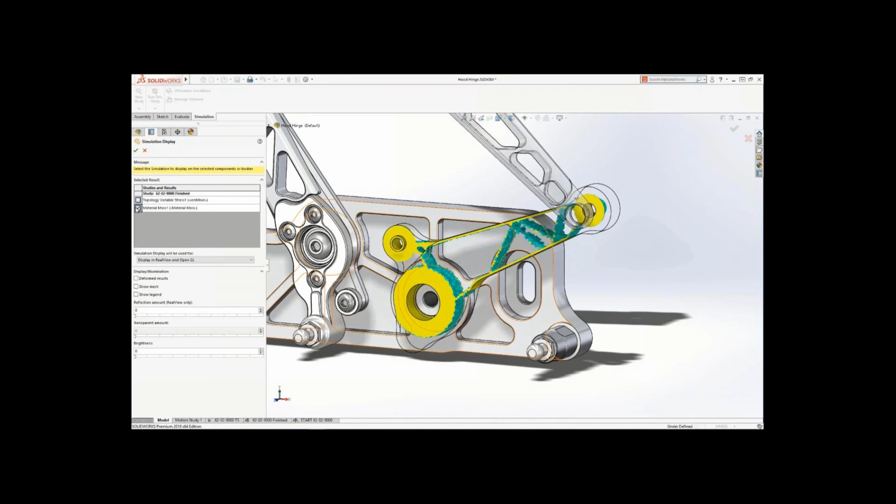With topology study to guide your optimal design form, you'll have more time to find the optimal functions for your design.

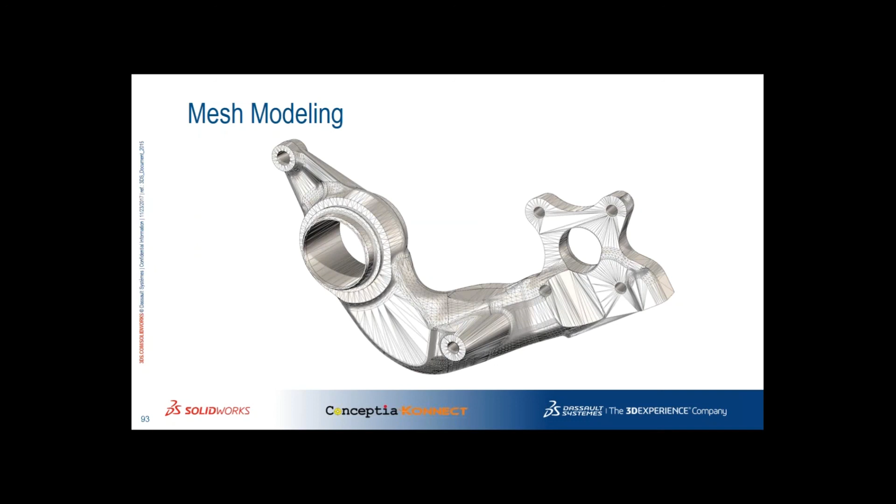Next, we have improvements to mesh modeling—that is, if you have a solid graphics body as a solid body. If a solid body is fully sealed, the user can apply materials, get mass properties, use graphic sections, and new formats, that is OBJ mesh—mesh, not point cloud data.

Customers can still use scanner software to create the mesh before opening in SolidWorks. New ability to sketch and reference mesh points, ability to build reference geometry of the mesh, new ability to boolean one mesh from another: add, subtract, combine, create, indent.

If you want to boolean a mesh to a SolidWorks part, then the SolidWorks part has to be converted into a mesh. There's a new command to do that. Let's take a look at this with a demo.

SolidWorks 2018 introduces new ways you can utilize mesh data, offering more possibilities than ever before for a variety of formats such as STL, OBJ, and additive manufacturing files.

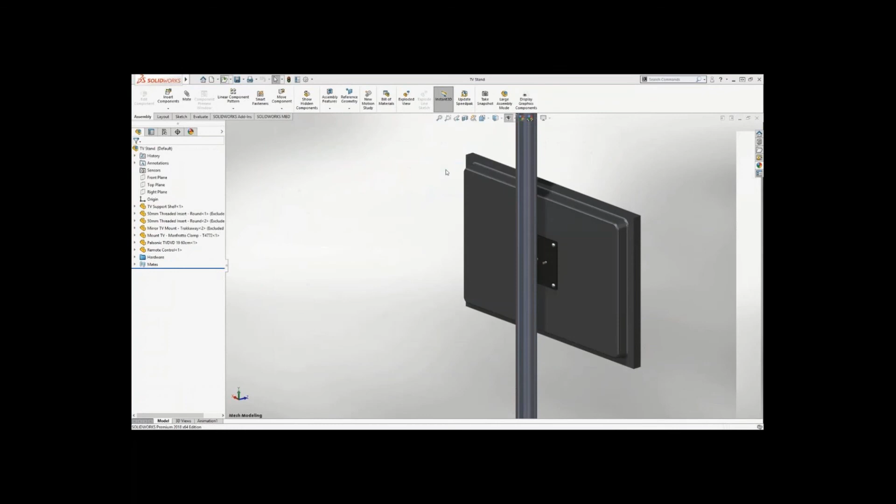First off, graphical mesh geometry now supports material textures and real-view appearances. Likewise, you can now perform sections on the graphical mesh data as well. As a result, you can better visualize and fully understand your mesh geometry right inside of SolidWorks.

However, we can do much more with mesh geometry, starting with the new Surface from Mesh feature. This tool enables you to turn mesh data into SolidWorks surfaces quickly, utilizing a simple workflow: just choose the type of surface you wish to create, then using the purpose-built Paint Select Facets tool.

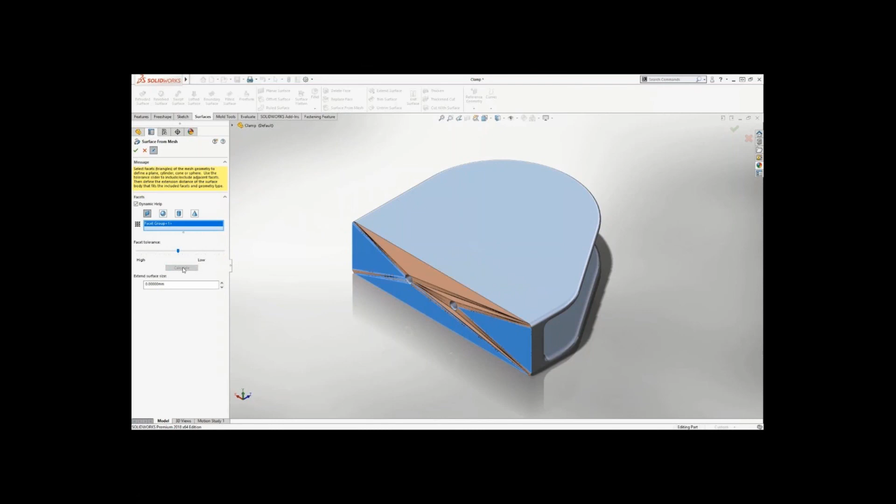You can easily swipe to select a handful of facets for the desired surface. Notice that not every surface needs to be selected—by simply choosing Calculate, SolidWorks will automatically gather the remaining faces for you and create the appropriate surface.

Once any number of surfaces have been created in this manner, they will benefit from all of the surfacing capabilities found in SolidWorks, allowing you to take full advantage of the surfacing tools.

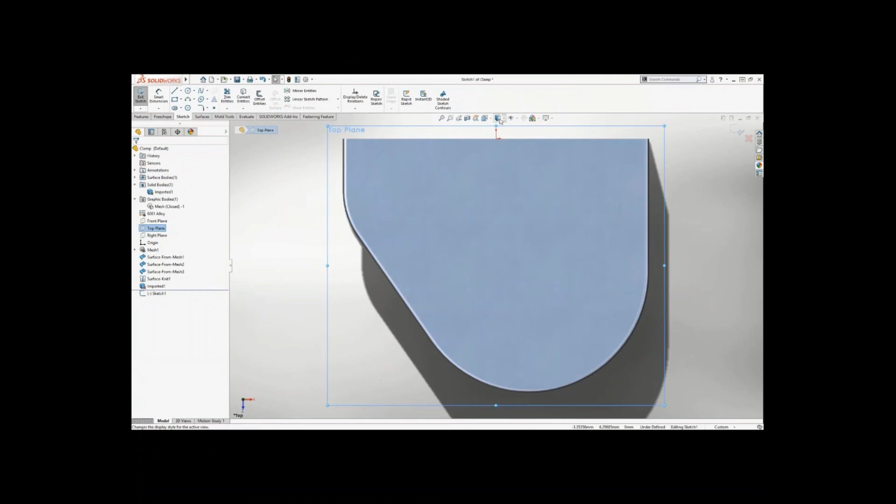You can take your mesh data further with some powerful new workflows specific to the mesh geometry. For instance, you can add any geometry to the mesh file using all of the familiar tools you are used to in SolidWorks. You can even reference the underlying mesh geometry when adding sketch relationships. The only difference is these features aren't automatically merged with the mesh geometry. To do that, you can now also convert traditional solid bodies into mesh bodies as well.

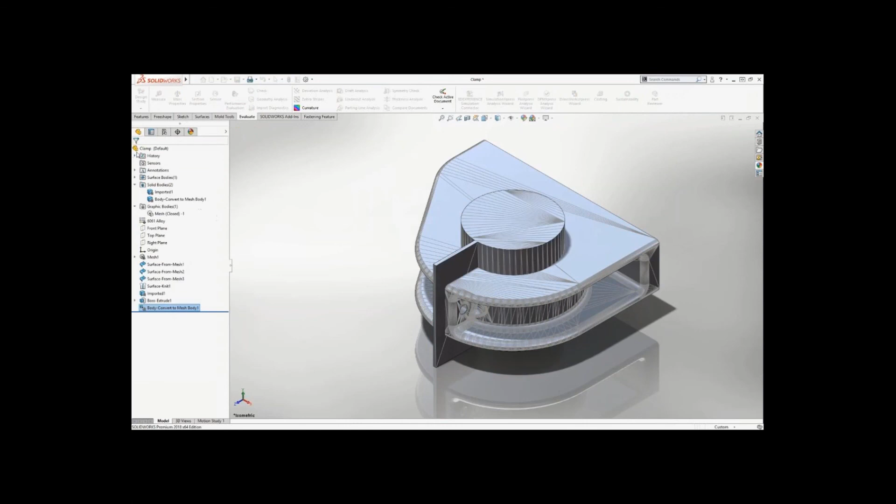With this, we can create features right in the mesh bodies. Let me convert this solid body into a mesh body. This ultimately allows you to take any geometry you have created and perform a variety of Boolean style features and further manipulate your mesh geometry. A full list of these features can be seen on the coming slides.

Finally, like any other SolidWorks file, these can be inserted into your assemblies and mated into position like any other component. This means that you can now directly use your mesh data within all of your SolidWorks designs without the need to convert them into a SolidWorks body. This helps you to break the productivity barriers by leveraging the mesh data from a variety of different formats. Allowing you to directly use the mesh body within your assemblies is a great productivity tool.

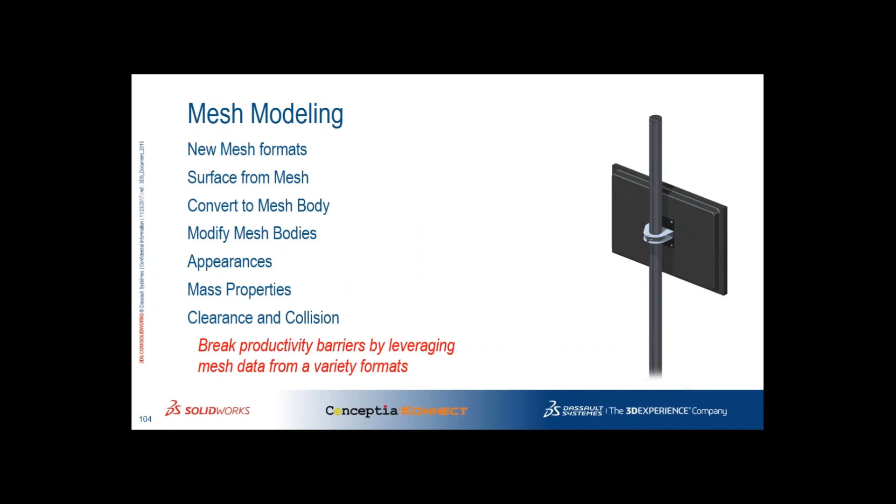Next, we'll take a look at the enhancements in 3D Interconnect. The 3D Interconnect feature was introduced in SolidWorks 2017. It helped us import third-party CAD data from other software like CATIA, ProE, NX, and directly use them within SolidWorks without the need of converting them to standard file formats. It also had a great feature wherein if you replace the imported file with a new revision, you need not delete and add this file again.

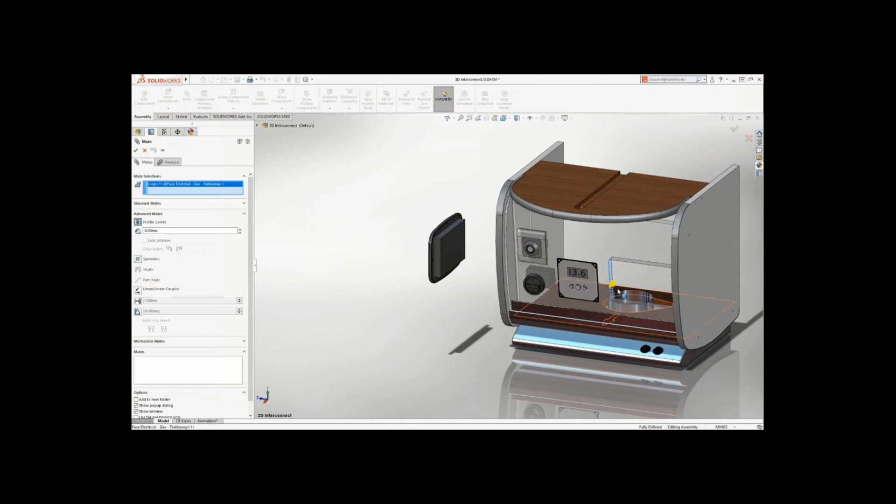These neutral files will recognize whether the files are changed or replaced, so your revisions can be maintained. And like third-party native files, they can be easily updated without the need for deleting and re-importing the files. However, neutral file formats do not support the same intelligent face ID mapping that the third-party files do.

Other new enhancements take your third-party 3D files further, including support for reference geometry. That is, reference planes that have been added in your third-party CAD files can now be used. These planes are useful for mating and can be used as sketch planes. Likewise, unconsumed sketches can be used like SolidWorks sketches, enabling you to reference and create features from files created outside SolidWorks. This will allow you to do more with your existing files from other 3D design tools, eliminating the need for time-consuming migration or conversion of data into neutral file formats.

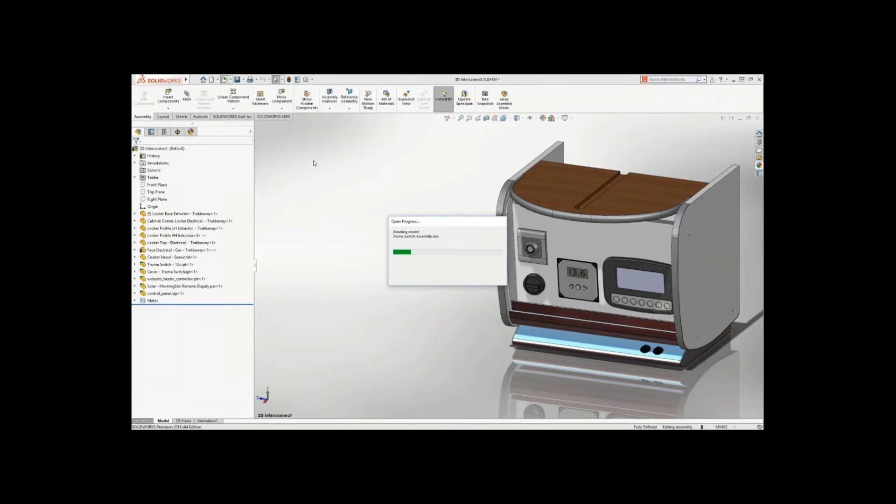Finally, custom properties are now supported for third-party CAD files. I'm opening this Inventor file, and as you can see, the custom properties associated with the Inventor file can be used. This means that the bill of materials and drawings can now automatically read and populate themselves using the information previously defined in the native design tool.

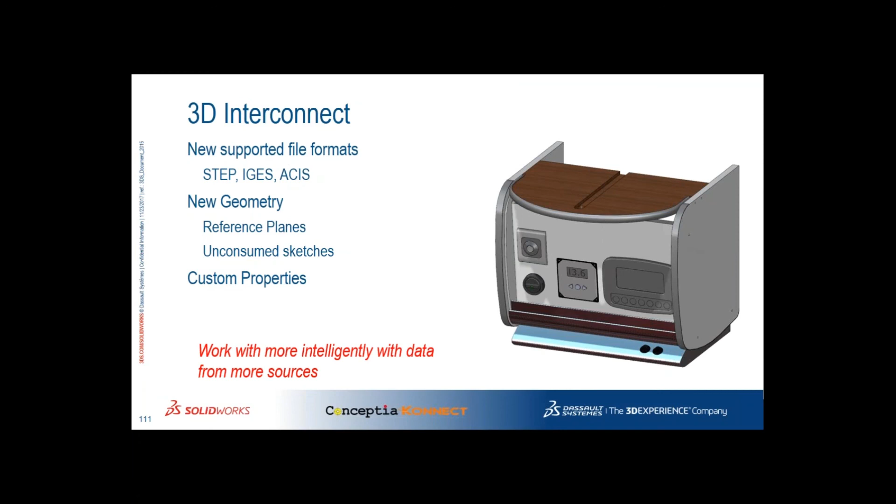3D Interconnect continues to allow you to leverage 3D design data from whatever source you like without compromising on capability, so that you can directly use the data from third-party CAD files within SolidWorks without the need of converting them to neutral file formats.

With continued flexibility, new tools to leverage the latest hardware technology and computing technology, and further integration of data from every source, SOLIDWORKS 2018 has the tools you need to meet the requirements for the next generation of great design.

As we move to the final stop on our roadmap introducing SOLIDWORKS 2018, the focus shifts to design deliverables. Think about all the content required: tooling and assembly documentation, detailed drawings, content to communicate with customers and suppliers, marketing and sales, plus many more. Being able to quickly create these design deliverables is every bit as important as the design itself. 2018 brings enhancements across the product line to leverage your design data. Let's take a look at a few examples.

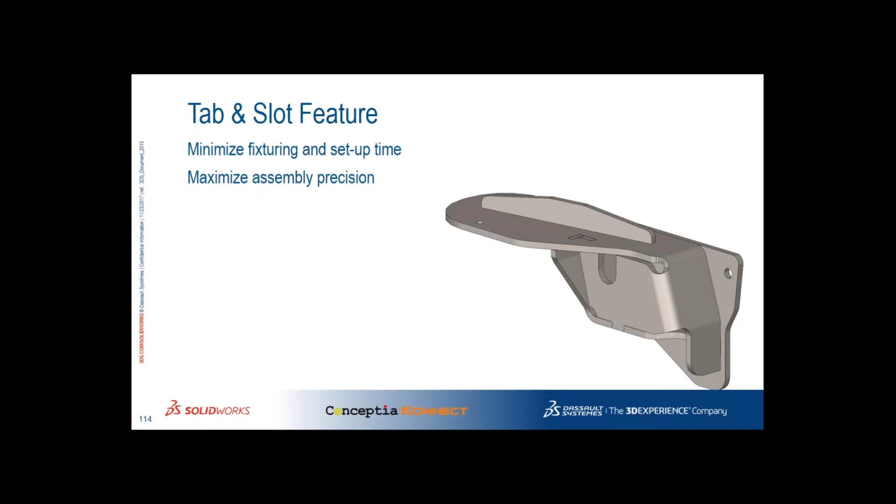First is the tab and slot feature, a popular technique to minimize the costs associated with creating fixtures for assembly and manufacturing, by designing tabs and slots into your designs. SOLIDWORKS 2018 introduces a powerful new tool to automate the creation of these self-fixturing designs. Let's take a look at it in the software.

A costly part of manufacturing is creating fixtures, so many designers are turning to self-fixturing design techniques to reduce assembly and setup costs in the manufacturing process. SOLIDWORKS 2018 introduces a powerful tab and slot tool to automate this design step. The tab and slot can be created on parts in an assembly, a single part, or a multi-body part. You start by choosing an edge to define the tab and a face to define where the slot will terminate.

Offsets can be applied to control the tab distance from the ends. Spacing can be defined equally among a given number of instances or by a defined length. The length of each tab can easily be specified, and the height can be a blind value or up to a surface or offset from the selected surface. Corner treatments such as fillets and chamfers can be applied to the tabs, and the size can be specified.

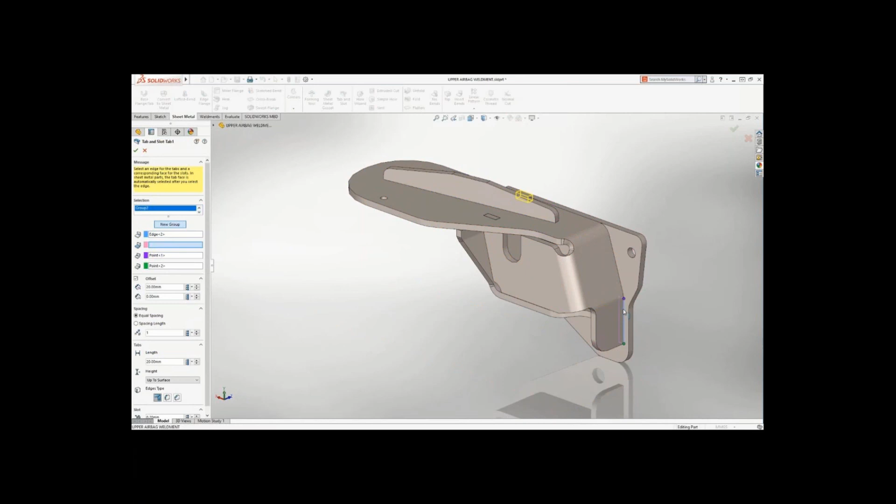The clearance between the slot and tab can be defined as well, and SOLIDWORKS creates features in both components to meet these specifications. These tab and slot features are fully editable. For instance, an additional tab and slot can be added on the side by adding a new group to the definition. This new tab and slot feature not only reduces design time by automating the creation of these features, but reduces manufacturing costs by minimizing the need to build expensive fixtures that can delay manufacturing.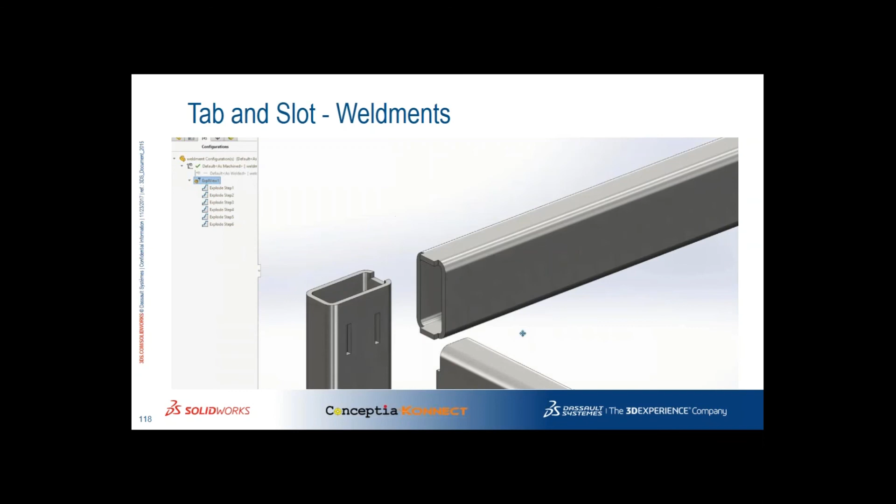Tab and slot can now also be applied to cylindrical parts. Weldments are also now supported for the tab and slot feature. Here you can see the tab and slots added to the weldment members to minimize fixturing. Weldment gussets are another good application for tab and slots.

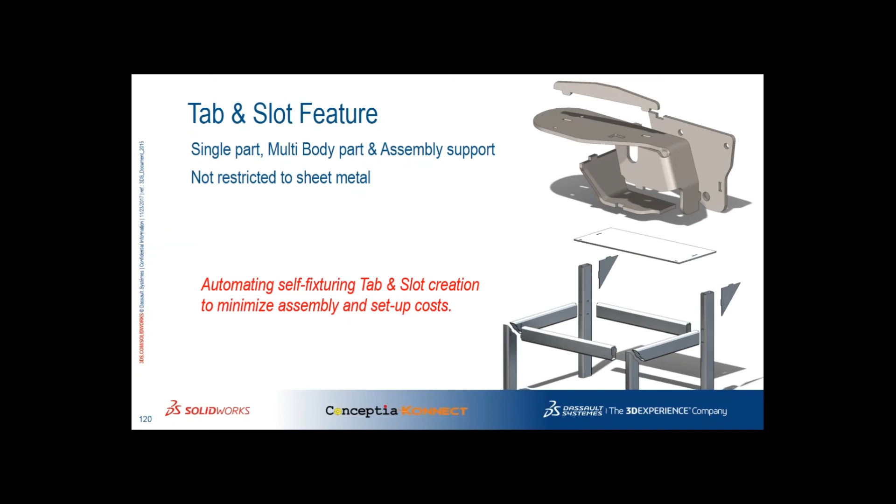Tab and slot features can be patterned and mirrored. Note that after patterning or mirroring a tab, the associated slot has to be patterned or mirrored in the corresponding part. With this, you can automate the creation of self-fixturing tab and slots, minimizing your assembly and setup costs for self-fixturing designs.

Next, we'll take a look at the enhancements in drawings. For many companies, the creation of drawings is still an important part of the product development process. With each release of SOLIDWORKS, our aim is to make documenting your design as quick and painless as possible. With 2018, you can now use more design and manufacturing information applied directly to the model using SOLIDWORKS model-based definition to help you create drawings even faster. The display of annotations is now easier to control. New options and capabilities have been added to enable you to create complex views that previously weren't possible without a lot of time and effort. Let's go ahead and take a closer look at these enhancements in the software.

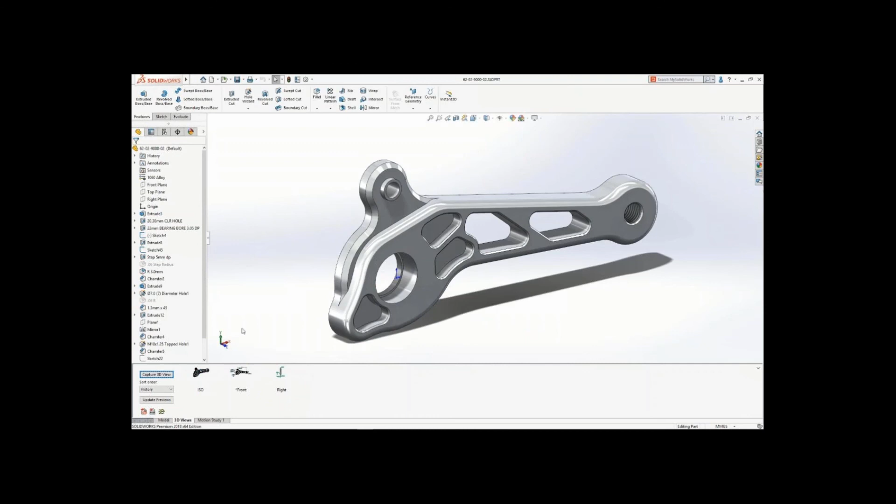SOLIDWORKS 2018 introduces some powerful tools for drawings. Now, 3D model views have been a great way of communicating the product manufacturing information, or PMI, applied directly to the model using DimXpert and SOLIDWORKS MBD. However, for many customers, a 2D drawing is still required as a final deliverable. In SOLIDWORKS 2018, when adding new views to a drawing, any pre-existing 3D model views now appear in the view palette, ready for placement onto the drawing sheet. A variety of options let you choose which annotation types to include, and a simple drag and drop is all that is required to place the view. Now you can leverage the power of model-based definition to help you create drawings even faster.

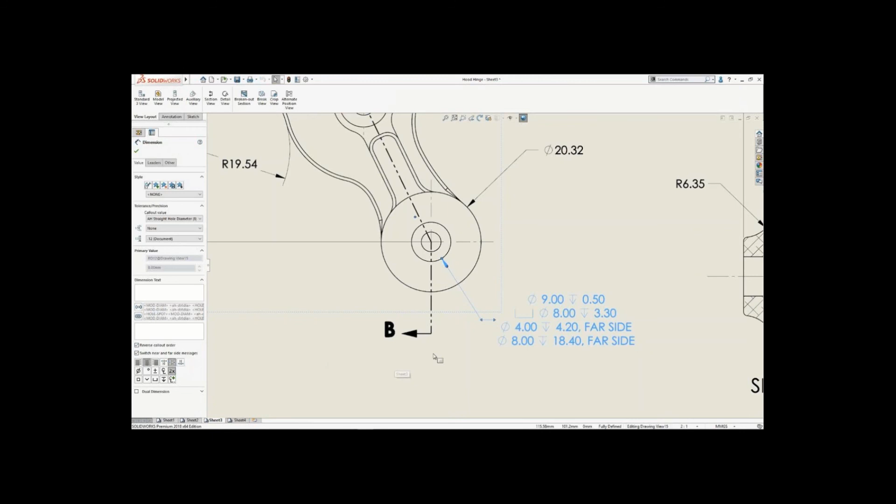Let's switch over to this next sheet. The advanced hole feature was introduced in 2017, a powerful tool for creating complex multi-step holes. In 2018, you can now quickly and easily detail an advanced hole using the hole callout feature. As you place the callout, new options give you control over how the information is displayed. Now you can apply all the information necessary to document multi-stepped holes in an instant.

SOLIDWORKS 2018 offers you even more flexibility over how drawing information is displayed. That is, when working with section views, layers can now be used to set cross-hatching visibility, different styles, and colors.

The behavior of trailing zeros is even easier to control. Using the new set of options in the document settings, you can specify the trailing zero display for dimensions, tolerances, and properties independently of one another. This removes unnecessary detail and makes your drawing easier to read for everyone.

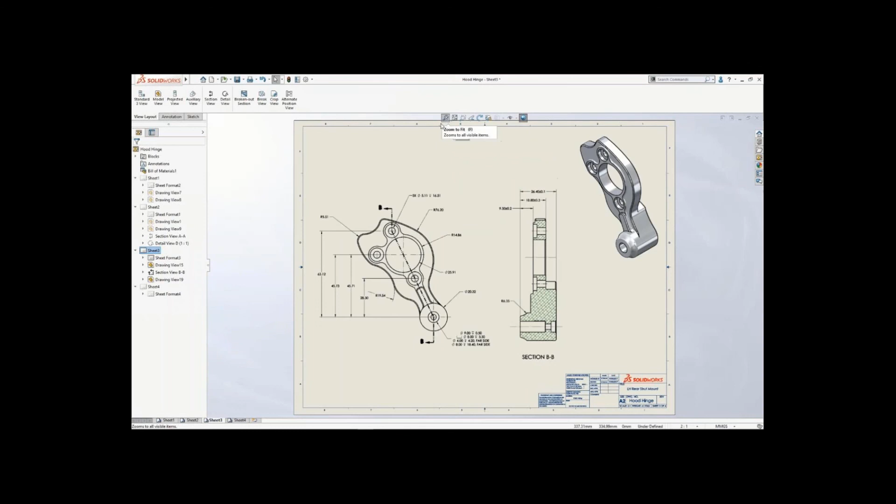2018 gives you much greater freedom when creating complex drawing views. Now you can create broken out sections of an existing section and alternate position view. Starting with a section view of this hinge mechanism, after first defining the broken out region—in this example a free sketched rectangle—the new randomized scale option can be used to increase clarity by mixing up the crosshatch scaling of each component when all the parts being sectioned use the same crosshatch style.

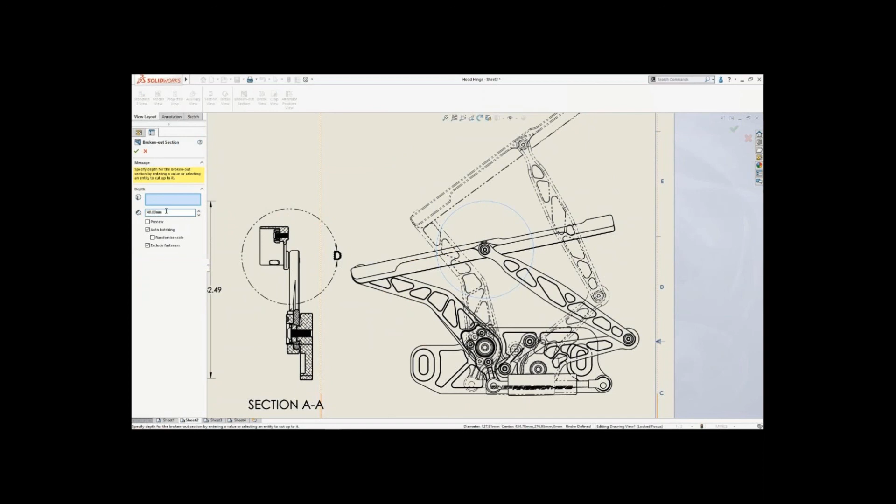Next, moving over to the alternate position view of the hinge mechanism, this pre-sketched circle can be used to create a broken out section detailing the arm and bracket fixing areas. These are just a couple of examples of how you can create complex broken out sections of more view types with minimal effort.

Company standards often require that all text on a drawing should be capitalized. Now in 2018, when editing tables, a handy new option on the table toolbar enables you to instantly switch all text to uppercase regardless of how it was typed. These are some of the powerful new productivity enhancements in 2018 that offer greater flexibility and ease of complex view creation.

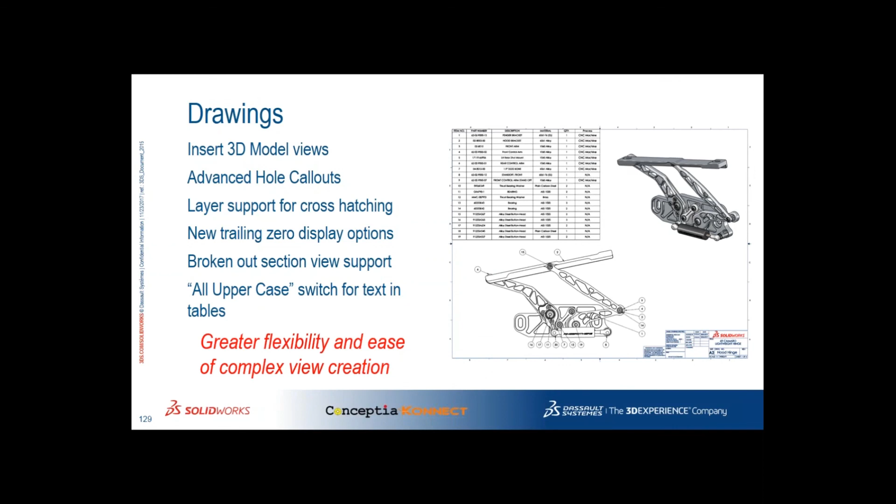Next, we'll take a look at the enhancements in eDrawings. Let me directly go into the software. eDrawings 2018 introduces many new enhancements to make collaboration with suppliers and manufacturers simpler and more powerful.

You now have the option in SolidWorks to embed decals within a part or assembly file. Previously, eDrawings would only display standard decals stored locally. Now every decal can be accurately displayed in eDrawings 2018.

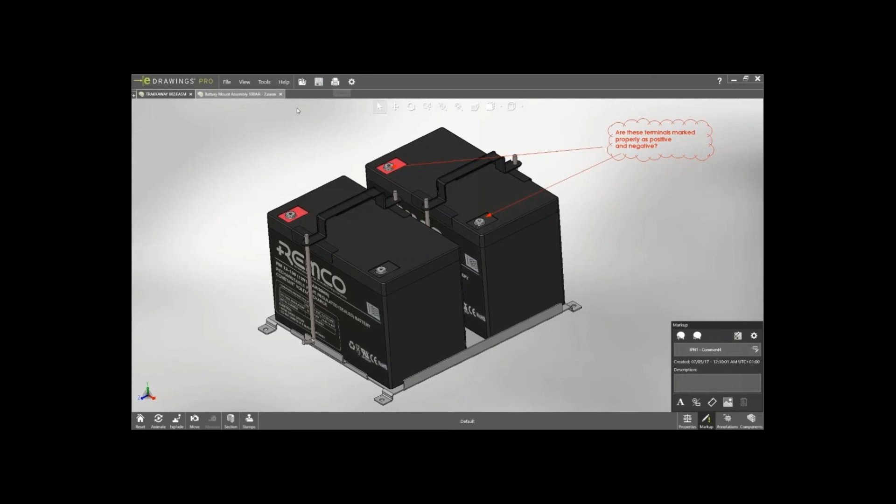You can now instantly see if any markups have been created with a new indicator down in the markup icon. A brand new quick access toolbar helps you get to commands such as open, save, print, and options. The plus icon next to the component tab gives you a shortcut to quickly open a file. A new progress indicator keeps you updated on how eDrawings is doing getting the assembly loaded.

eDrawings now supports the very latest graphics pipeline, making sure graphics boost is set to faster speed to take advantage of the performance improvements. If you need to move components or make a measurement, you can now set the units to feet and inches. This gives you more flexibility in day-to-day interrogation of your 3D models within eDrawings.

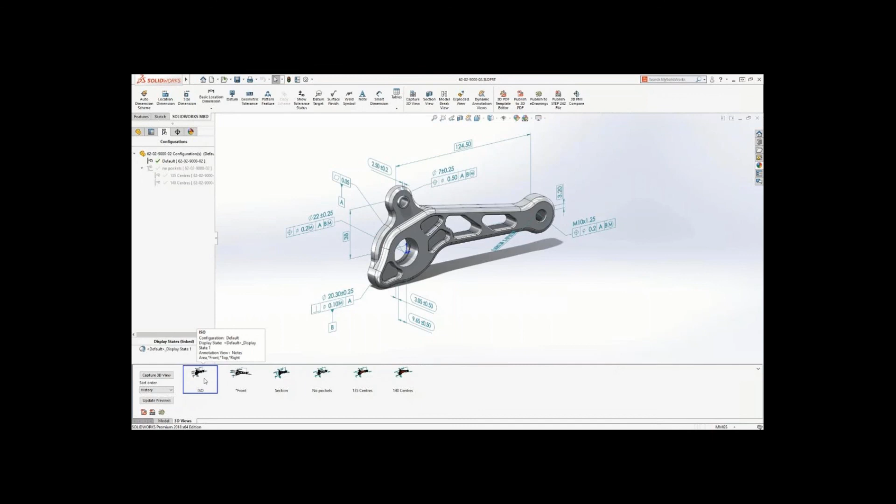Switching back to SolidWorks, as you've seen, model-based definition is a great way to communicate your designs without the need of creating 2D drawings. Now, 3D views contain dimensions and other annotations for multiple configurations of the design.

SolidWorks 2018 now lets you publish all of this information into a single file containing STEP 242 file attachments, and optionally set a password directly in the export dialog.

Back in eDrawings 2018, the model is accurately displayed along with the related dimensions in 3D views for the default configuration. The 3D views of other configurations can be shown with the new Show All option. eDrawings also indicates the configuration name at the bottom of the screen to remove any confusion. The attachments specified in SOLIDWORKS are also clearly visible.

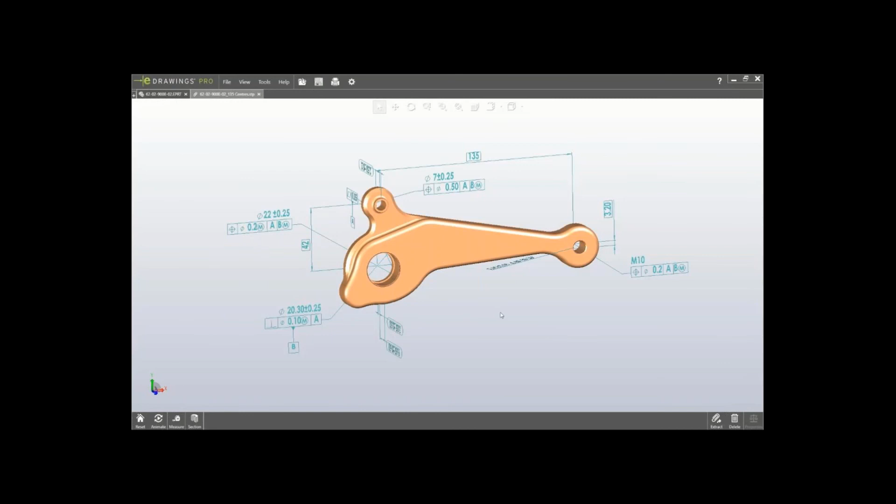Each attached STEP file can be viewed, extracted to disk, or deleted. eDrawings 2018 now fully supports the viewing of STEP 242 files. This includes cross-highlighting of dimensions to the corresponding geometry, helping manufacturers understand the design and reducing the chance of errors. All these enhancements help collaboration through driving smarter decisions across your supply chain.

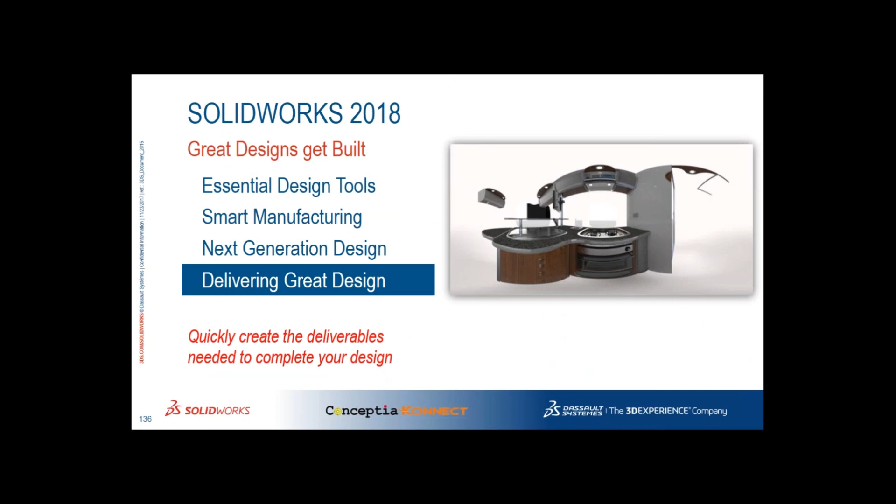With all these new enhancements, you get increased performance and better support for your smart manufacturing and better communication with the eDrawings tool. So with this, from core drawings and exciting new possibilities with the tab and slot feature, SOLIDWORKS 2018 offers enhancements across the product line to quickly create the design deliverables you need to complete your design.

As we wrap up this introduction of SOLIDWORKS 2018, let's revisit the tracker. Remember the challenges they faced? Since implementing SOLIDWORKS, tracker has cut their time to market in half and doubled their product offering. Tremendous success story and truly a great design.

Beyond a great story of design, it's a perfect example of how great products or great designs get built with SOLIDWORKS 2018.